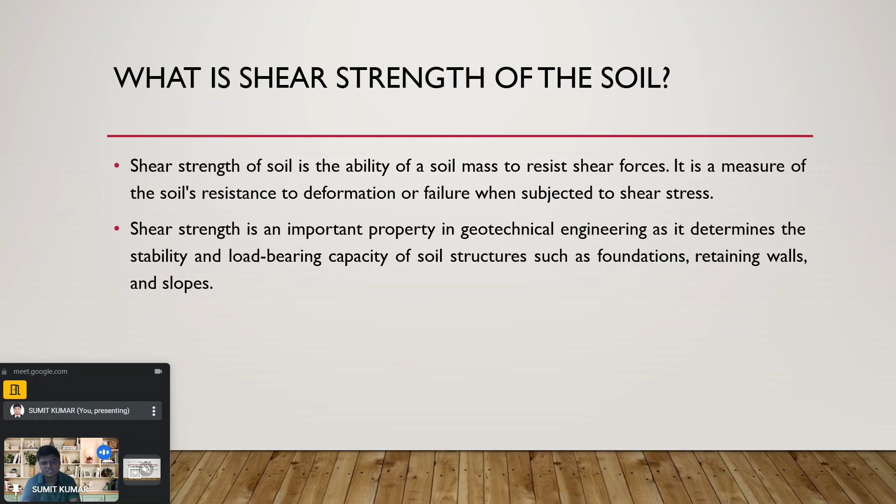Shear strength is a measure of the soil's resistance to deformation or failure when subjected to shear stress. It is an important property in geotechnical engineering as it determines the stability and load bearing capacity of the soil structure, and is essential for constructing any foundation, retaining wall, or slope.

Talking about some of the important parameters through which we find the shear strength, as we covered earlier in the triaxial test, the shear strength parameters are cohesion and angle of internal friction. Cohesion represents the shear strength of soil particles due to intermolecular force and is more significant in cohesive soils such as clay, while the angle of internal friction represents the resistance of soil particles to sliding and is more relevant in cohesionless soils such as sand.

Talking about how we can determine the shear strength of soil: the primary tests covered during this lecture series are the triaxial test, the direct shear test (also known as the box shear test), and the vane shear test, covered in detail. These tests help in understanding and generate a better outcome for geotechnical and civil engineers before construction, helping them design safe and stable structures by considering the shear strength properties of soil.

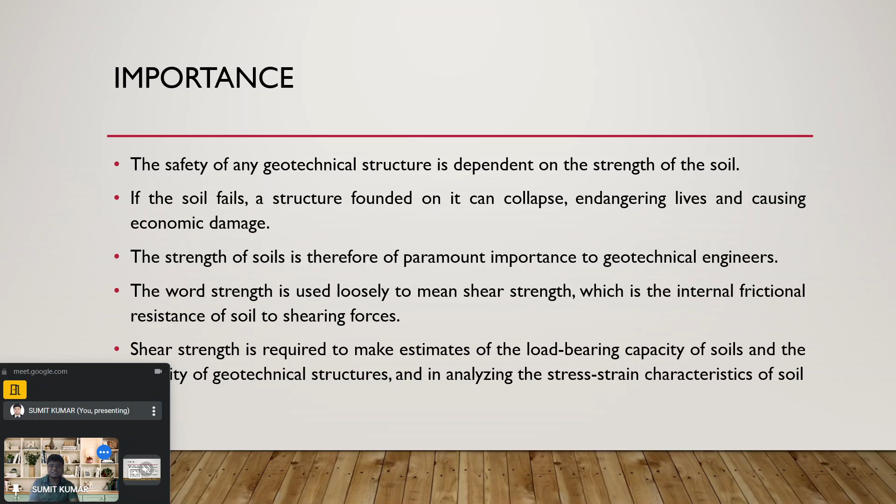Shear strength is required to estimate the load bearing capacity of soil and the stability of the geotechnical structure, and for analyzing the stress-strain characteristics of soil. So the importance of shear strength becomes very significant.

Adding some points: shear strength is a critical factor in geotechnical engineering as it determines the stability and behavior of soil under different loading conditions. Understanding shear strength is essential for designing foundations, slopes, retaining walls, and other structures. Shear strength plays a crucial role in preventing failures such as landslides, embankment collapses, and foundation settlement.

Talking about shear strength in granular soil, as we know there are granular soils and clay soils. Granular soil such as sand exhibits unique behavior under stress. In flexible boundary containers, granular soil tends to flow when subjected to stress, while in rigid boundary containers, volumetric deformation occurs, leading to changes in the shape and density of soil. Crushing, bending, and rolling mechanisms can also affect the shear strength of granular soil.

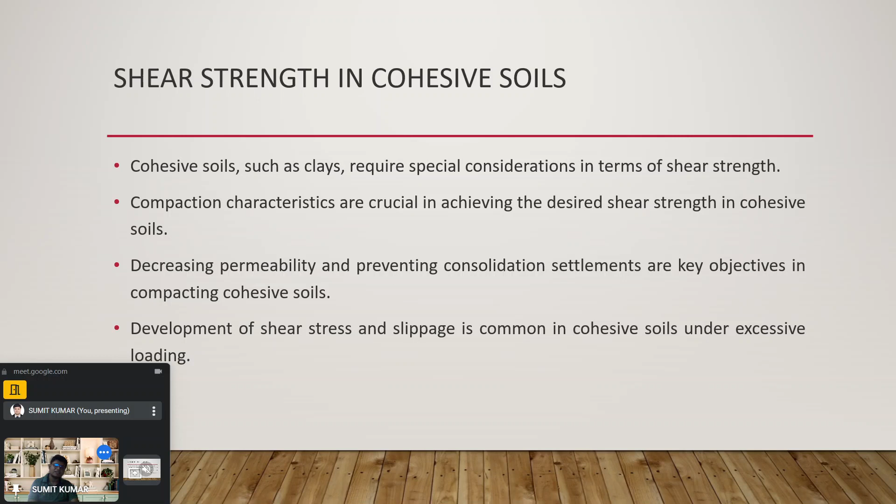Talking about shear strength in cohesive soil like clay, it requires special consideration. Compaction characteristics are crucial in achieving the desired shear strength in cohesive soil. Decreasing permeability and preventing consolidation settlement are key objectives in compacting cohesive soil. Development of shear stress and slippage is common in cohesive soil under excessive load.

So when the applied shear stress is greater than the critical shear strength of the soil, it results in failure at a specific section.

Now you can see some real examples. Over there, the detached body and parent body are represented very cleanly. You can also see that the soil section gets removed from that plane, and the main section remains stated there. So the parent body and the detached body fall down due to the failure.

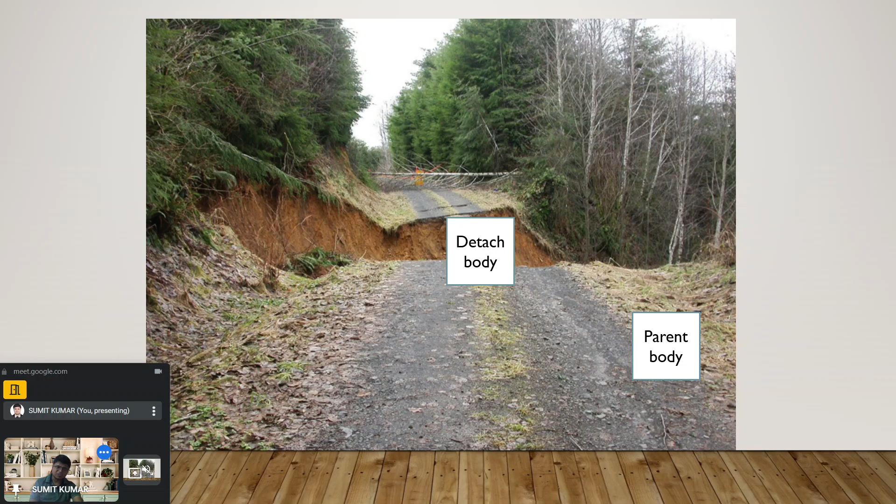Now we talk about the equilibrium equation and Mohr circle. We have also come across the knowledge of the Mohr circle during our very first class, so I will carry forward from those classes.

Equilibrium equations are used to analyze the state of stress in soil. They involve the relationship between the normal stress and the shear stress. One more point: the square of normal stress plus shear stress ultimately gives the radius, so the equation can be represented graphically using the Mohr circle.

In the Mohr circle, the x coordinate has sigma 1 and sigma 3, generalized in the form of the equilibrium equation. Afterward, you can see that the horizontal axis is the normal stress axis, while the vertical axis is the shear stress axis. This type of Mohr circle could be formed, and several problems were also taken during the first session, so you can go across those questions in the meanwhile.

I think you already have gone through those conceptual points, so there will not be any problem in anyone's mind. Okay, now...

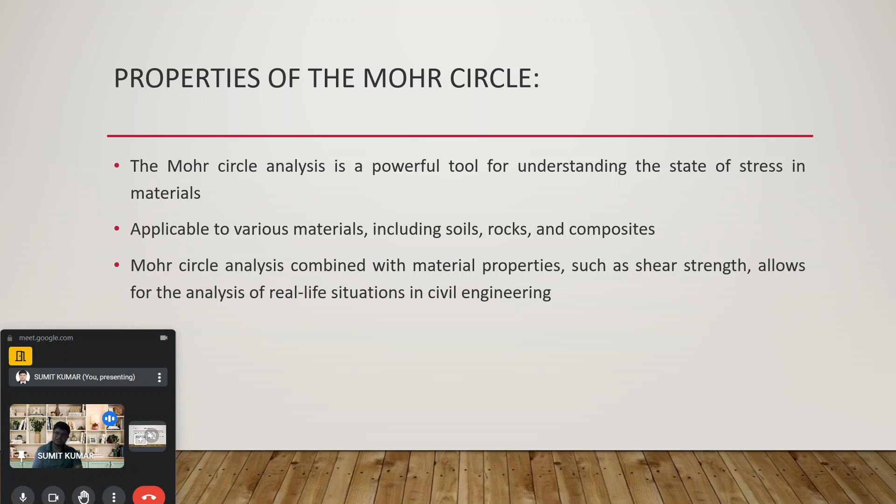Talking about the simplified solution, basically our ultimate aim is to simplify the solution to solve it analytically, and graphically is another way to solve this problem as it has normally been formed. The shear failure is a common model for the failure of soil. In the simplified solution, focus is on the shear failure and rigid body behavior. The Mohr circle is used to analyze the state of stress in soil undergoing shear failure.

The assumption is sigma x is equal to sigma 1, the major principal stress, and sigma z is equal to sigma 3, the minor principal stress. So this is one of the other perspectives.

Now, generalizing the solution: understanding the state of stress in soil is crucial in geotechnical engineering. The Mohr circle provides a useful tool for analyzing the stress and failure in soil. The simplified solution and the generalizations help in practical application. The Mohr circle defines the state of stress acting at a given point, which is sitting on a plane along which the failure is about to take place.

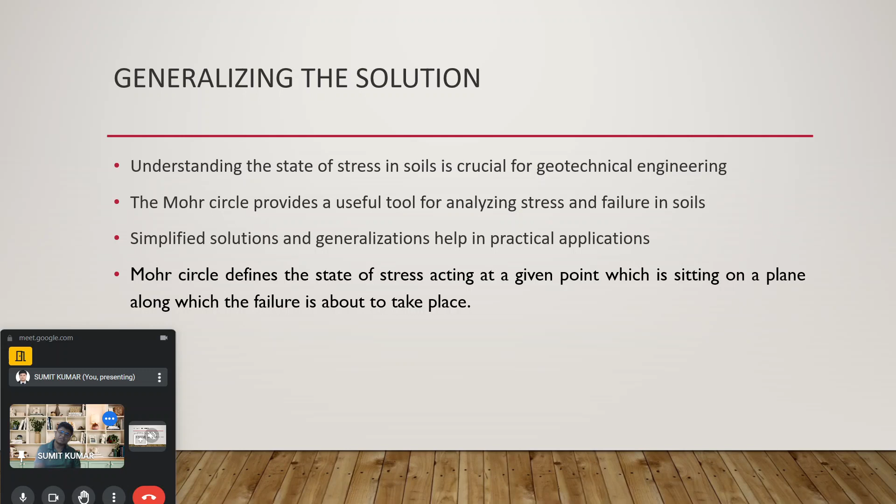Talking more about the Mohr circle analysis, so deriving the relationship between sigma square and tau square as a circle equation.

The interpretation of the Mohr circle is representation of the state of stress in a material. There are two stresses: one is the principal major stress, and another is the principal minor stress, sigma 1 and sigma 3. And a Mohr circle defines the state of stress at a point on a plane where the failure is about to occur.

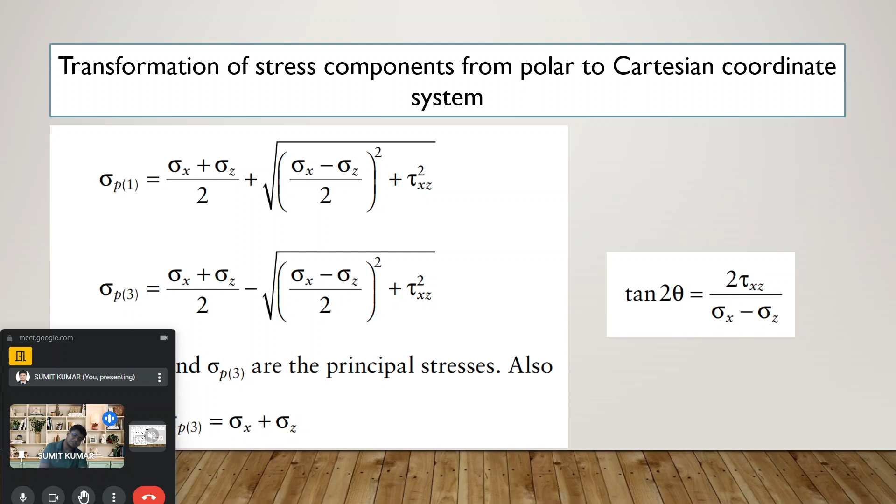Talking about its application in civil engineering is equally important. The example of infrastructure development in hilly terrain, cutting slopes and creating benches of roads and pavement. Importance of understanding the critical state of stress in such situations, and real life case studies for stabilizing slopes and constructing retaining walls are some of the applications served.

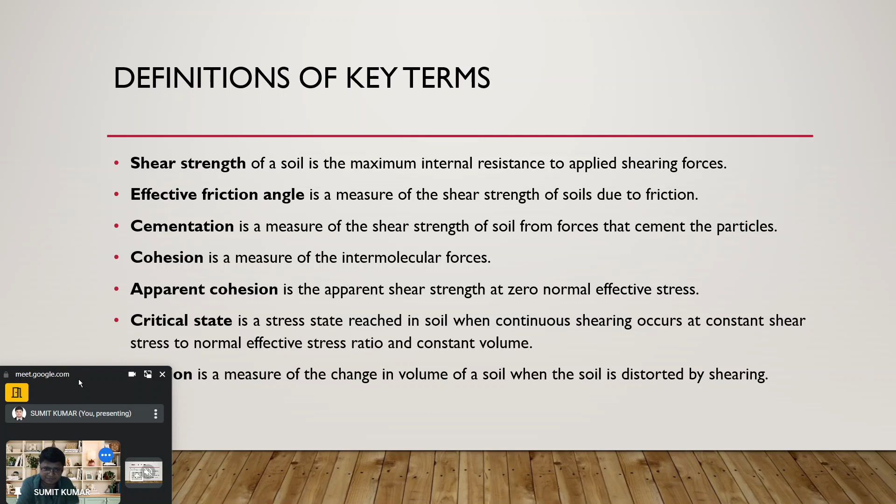Talking about shear strength: the shear strength of a soil is the maximum internal resistance to the applied shear force. Talking about the effective friction angle, it is actually a measure of the shear strength of soil due to friction. When you talk about cementation, it is a measure of the shear strength of soil from forces that cement particles apply. Talking about cohesion, it is a measure of intermolecular forces, and apparent cohesion is the apparent shear strength at zero normal effective stress.

Critical state is a stress state reached in the soil when continuous shearing occurs at constant shear stress to normal effective stress ratio, and constant volume. Talking about dilation, dilation is a measure of the change in the volume of soil when the soil is distorted by shear.

Now we move to the Mohr-Coulomb failure criteria, which is the basic main part of shear strength, where effective and total stress parameters are discussed. We will take some more points in detail, and communicate about the different types of tests which are present.

The Mohr-Coulomb failure criteria gives the functional relation between normal and shear stress on the failure plane, given as a function of sigma, where S is the shear stress at failure and sigma is the normal stress on the failure plane. So S equals C plus sigma tan phi, where C is the cohesion and phi is the angle of internal friction. This has been drawn with the shear strength axis and the normal pressure axis shown.

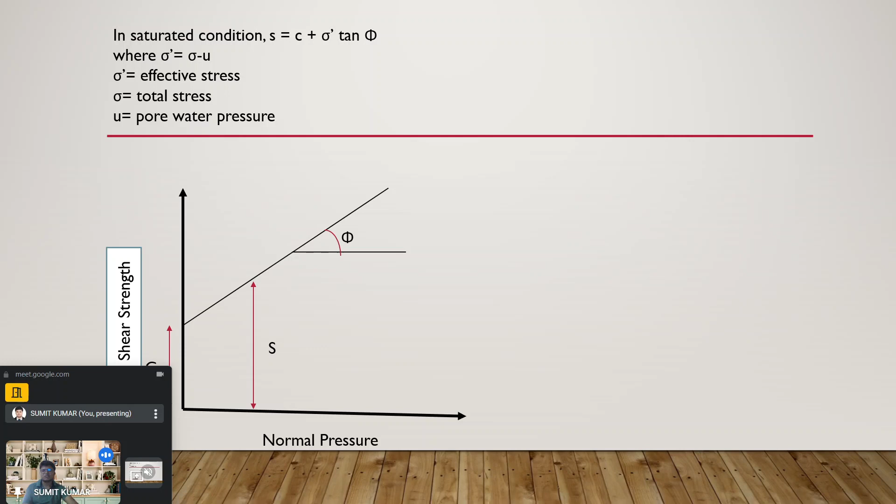So we know that S equals C plus sigma dash tan phi, where sigma dash is nothing but sigma minus u, and sigma dash is the effective stress, sigma is the total stress, and u is the pore water pressure. So total stress minus pore water pressure is the effective stress.

The major factors that influence shearing include earthquakes, which can lead to relative motion between soil layers. If a fault causes one portion of the ground to slip down, it leads to shearing, emphasizing that understanding the state of stress during shearing is crucial for stability assessment. Other factors causing shearing in soil are slope instability and different construction activities. We will go one by one through these.

Talking about application, from the start we've discussed that whatever we are studying, we should question ourselves whether it is important and what its significance is, how the study of shear strength could function.

Talking about the engineering significance of understanding shear strength in geotechnical projects, shear strength analysis helps in designing foundations, retaining walls, and slopes. The role of shear strength is most important in assessing the stability of natural and man-made slopes. Human activity like construction and expansion can alter the state of stress in soil mass, and these incremental changes in stress can lead to shearing, especially along weak planes.

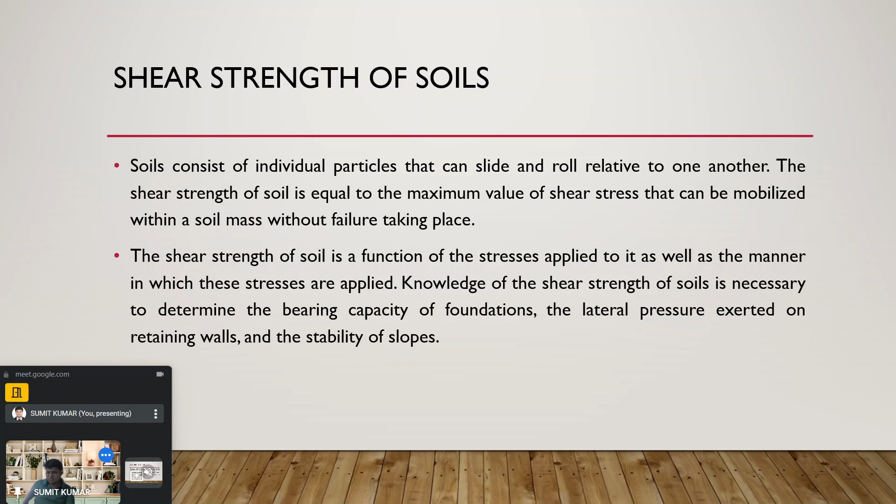When we go ahead, we come to know there are different types of tests through which we can calculate shear strength, but we primarily focus on three. We'll go one by one with their names. The first is the shear box test, which is a direct shear test. The second is the triaxial test, which is the most popular, also known as the main method of finding shear strength.

The vane shear test is another test in which torque is applied, and based on that, since the diameter of the vane is already known to us, we find the solution for the respective problem. So the different tests for shear strength are: the shear box test, triaxial test, vane shear test, torsional shear test, flat jack test, and penetration test.

The shear box test is a 2D simulation of soil conditions, and it provides a plane strain or plane stress representation of shearing behavior.

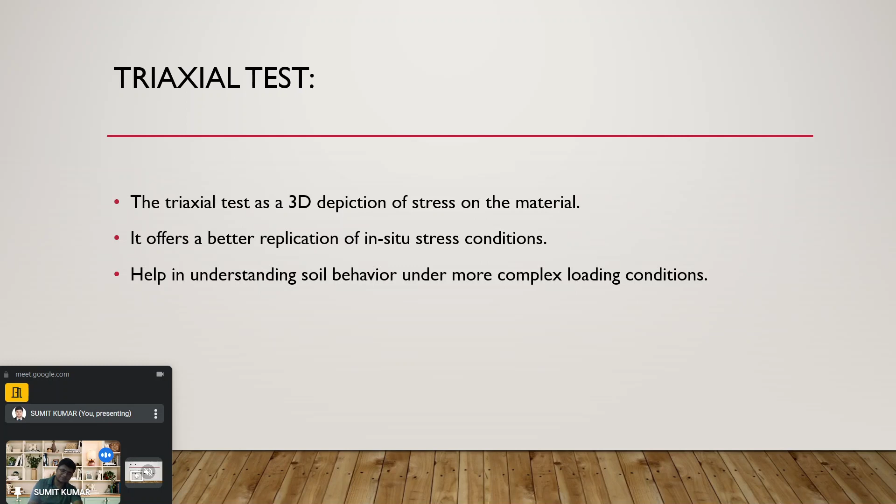Talking about the triaxial test, it is a 3D depiction of the stress on the material. It offers a better replication of in-situ stress conditions and helps in understanding soil behavior under more complex loading conditions.

Talking about the Vane shear test, it is used for soft and sensitive soils, and is applicable in laboratory and field settings, including offshore environments, to measure the undrained shear strength in difficult sampling situations.

Talking about another test, the torsional shear test, it was introduced to overcome the limitation of the shear box test at higher shearing levels, by inducing the magnitude of strain to the sample. It is significant in studying material behavior at shearing levels.

Talking about the flat jack test, it is used in rock.

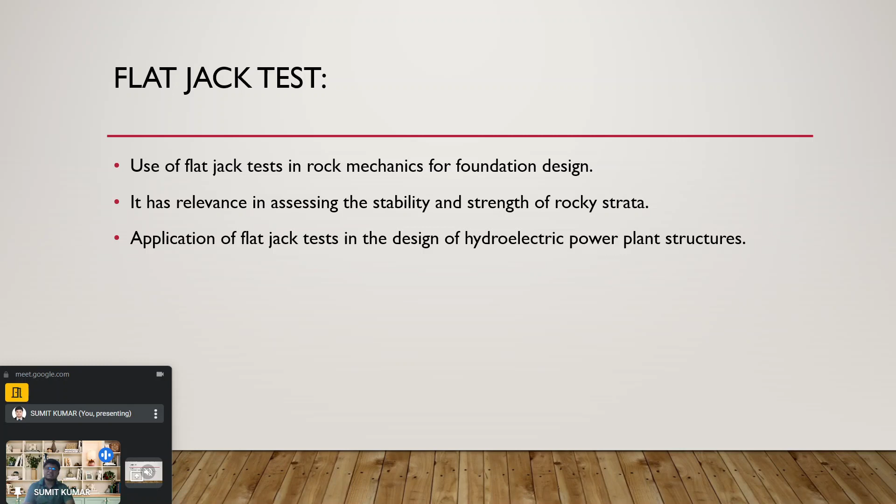The flat jack test is one of the tests through which shear stress could be calculated, and the penetration test is another method in which the SPT is first found.

Now, the method specifically used is the direct shear test, that is the box test, and the triaxial test for our analysis.

Talking about the direct shear test, this test is carried out on a soil sample confined in a metal box of square cross section, which is split horizontally at the mid height. A small clearance is maintained between the two halves of the box.

Now we are talking about the direct shear test. The test is carried out on a small soil sample confined in a metal box of square cross section, split horizontally at the mid height. A small clearance is maintained between the two halves of the box, and the soil is sheared along a predetermined plane by moving the top half of the box relative to the bottom half.

The soil is sheared along the predetermined plane by moving the top half of the box relative to the bottom half. The box is usually square in plan, typically 60 by 60 mm, and here is a typical diagram depicting the section of the direct shear test.

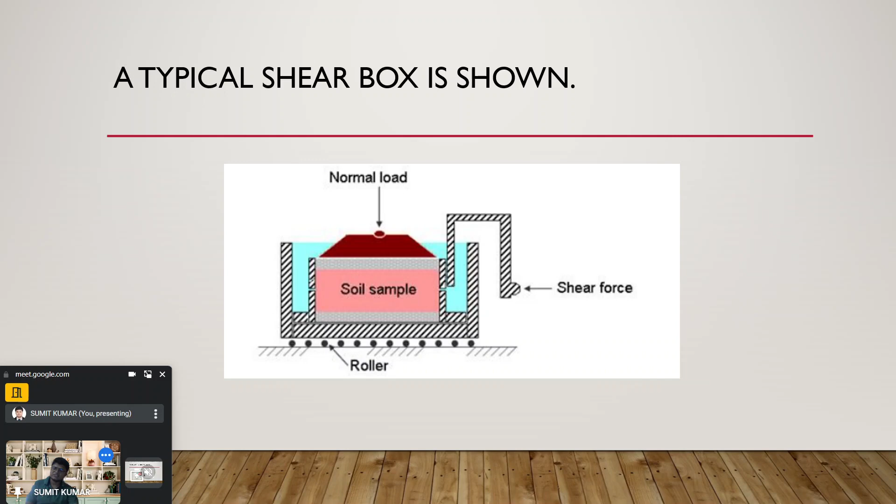You can see the conditions needed for this test: if the soil is fully or partially saturated, perforated metal plates and porous stones are placed below and above the sample to allow free drainage. If the sample is dry, solid metal plates are used.

A load normal to the plane of shearing can be applied to the soil sample through the lid of the box.

Talking about tests on sand and clay: tests on sand and gravel can be performed quickly and are usually performed dry, as water is found to not have a significant effect on the drained strength. For clay, the rate of shearing must be chosen to prevent excess pore water pressure building up.

Talking about the procedure: a vertical load is applied on the sample, then shear stress is gradually applied horizontally by causing the two halves of the box to move relative to each other.

A number of soil samples are tested each under different vertical loads, and the shear stress at failure is plotted against the normal stress of each test. This also shows that there is no excess pore water pressure in the soil, and the total and effective stresses are identical at failure, so the failure envelope can be obtained.

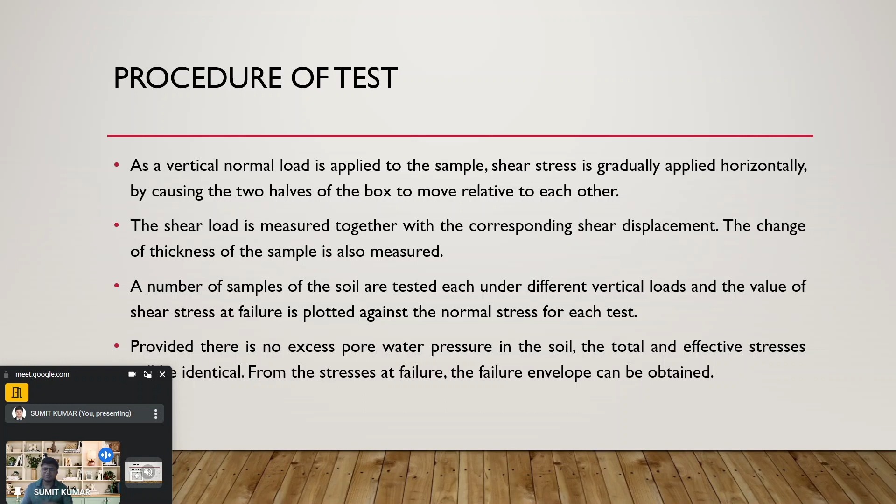Some advantages it offers: it is easy to test and understand gravels, and large samples can be tested in larger shear boxes, as small samples can be misleading.

Talking about some more advantages: the sample can be sheared parallel or perpendicular to the plane when the shear strength along features or selected planes is needed.

Talking about some disadvantages: the failure plane is already horizontal in this test, and this may not be the weakest plane in the structure.

The shear box apparatus cannot give a reliable undrained test, because it is not possible to prevent localized drainage away from the shearing zone.

Now we move to the triaxial test. Before we see the triaxial test, we have to understand this replicates the true 3D condition of the field. The triaxial test is carried out in a cylindrical cell, with a sample having a length to diameter ratio of 2, usually the size of 76 into 38.

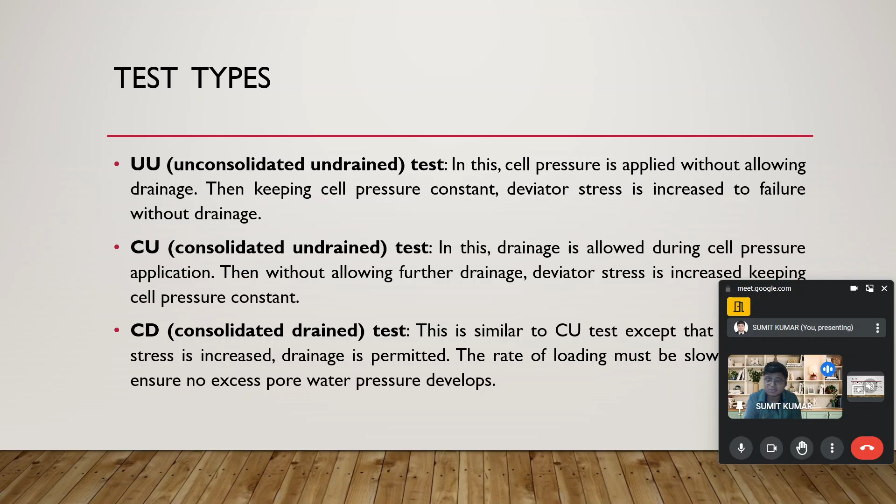In the consolidated undrained test, drainage is allowed during the cell pressure application, and then without allowing further drainage, the deviator stress is increased, keeping the cell pressure constant. For the consolidated drained test, this is similar to the CU test except that the deviator stress is increased while drainage is permitted, and the rate of loading must be slowed down to ensure no excess pore water pressure develops during this condition.

I'm talking about the significance. The first stage simulates the in-situ condition in which soil at different depths is subjected to different effective stresses, representing the actual three-dimensional case the soil faces in reality. Consolidation will occur if the pore water pressure which develops upon application of the confining pressure is allowed to dissipate. Otherwise, the effective stress on the soil equals the confining pressure, or total stress, minus the pore water pressure existing in the soil.

During the shearing process, the soil sample experiences axial strain, and either volume change or development of pore water pressure occurs, because we are talking about total stress parameters. You are already clear about total and effective stress parameters when we discuss C and phi, and C dash and phi dash. The magnitude of shear stress acting on different planes of the soil sample is different. When at some strain the sample fails, the limiting shear stress on the failure plane is called the shear strength.

Now talking about the advantages of the triaxial test over the direct shear test.

The soil sample is subjected to uniform stresses and strain, and different combinations of confining and axial stresses can be applied. Drained and undrained conditions can be carried out, and pore water pressure measurement is one of the best advantages here, which is not possible in the direct shear or box shear test. The complete stress-strain behavior can be determined, and with the help of that we are able to form the Mohr circle.

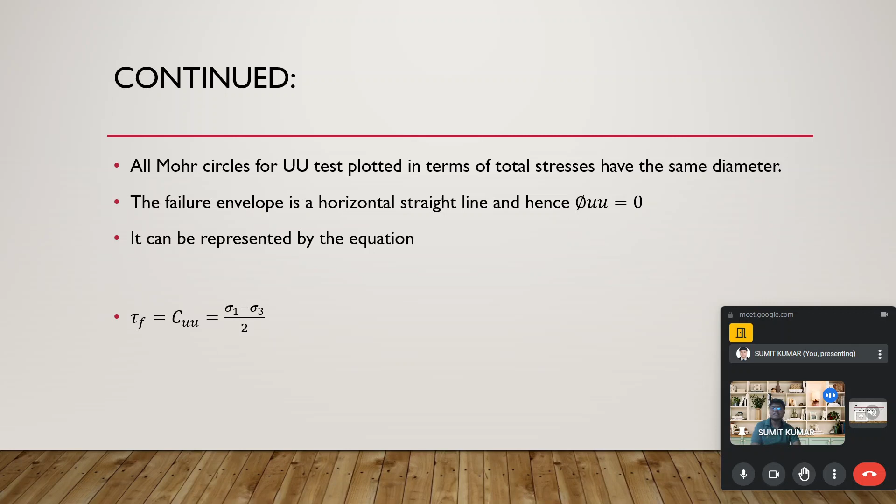Talking about the Mohr circle for the UU test plotted in terms of total stress, it has the same diameter. The failure envelope is a horizontal straight line, hence phi UU is going to be 0. It can be represented by the equation: tau F equal to CUU equal to sigma 1 minus sigma 3 by 2. When talking about the CU and CD test,

the phi CU and phi CD values will be found when we measure the angle with the horizontal plane, and C and phi will be the intercept at which these intersect when the common tangent is drawn to the Mohr circle envelope, to form the Mohr circle envelope.

For the tests involving drainage, in the first stage, when the Mohr circles are plotted in terms of total stress, the diameter increases with confining pressure, resulting in the failure envelope. Each inclined line has an intercept on the vertical axis, which is the cohesion, and the angle measured with horizontal is the friction angle.

It can be stated that for an identical soil sample tested under different drainage conditions in UU, CU, CD tests, the failure envelope is not unique, and this is because we are talking about the total stress approach.

But when we move to the effective stress approach, the results confirmed by the three tests show the exact same outcome. So the effective stress parameter, when we talk about it, the same triaxial test results of UU, CU, CD tests are plotted in terms of effective stress, taking into consideration the measured pore water pressure. It is observed that all the Mohr circles at failure are tangent to the same failure envelope, indicating that the shear strength is a unique function of the effective stress on the failure plane.

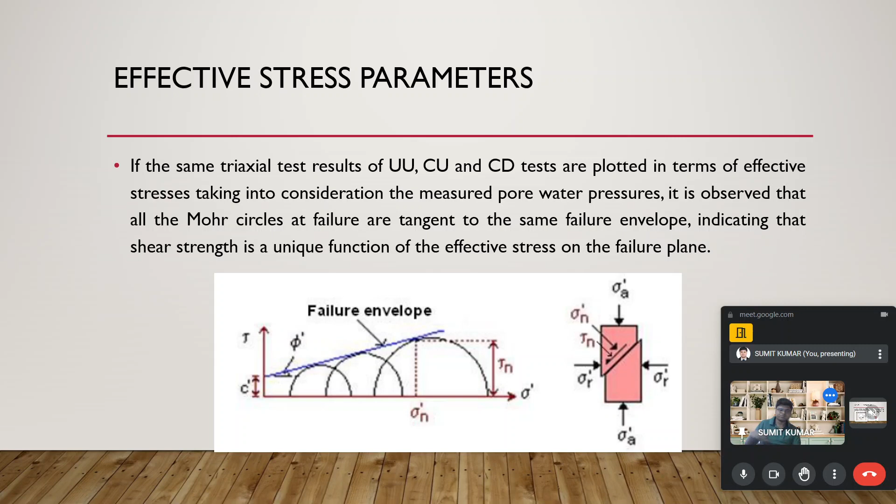Now going ahead, this failure envelope is the shear strength envelope, which may be written as tau f equal to C dash plus sigma dash tan phi dash, where C dash is the cohesion intercept in terms of effective stress, and phi dash is the angle of shearing resistance in terms of effective stress. So sigma n dash is the effective stress acting on the rupture plane.

Phi dash is the angle of resistance in effective stress, and sigma n dash is the effective stress acting on the rupture plane at failure, and tau n is the shear stress on the same plane, and is therefore the shear strength.

Now we interrelate sigma 1 and sigma 3 as: sigma 1 dash equal to sigma 3 dash into (1 plus sine phi dash) by (1 minus sine phi dash) plus 2c dash root under (1 plus sine phi dash) by (1 minus sine phi dash).

It is also interrelated in another term using tan: sigma 1 dash equal to sigma 3 dash tan squared of (45 plus phi by 2) plus 2c tan of (45 plus phi by 2), because when we solve trigonometrically both are the same thing. Now talking about triaxial testing in geotechnical engineering.

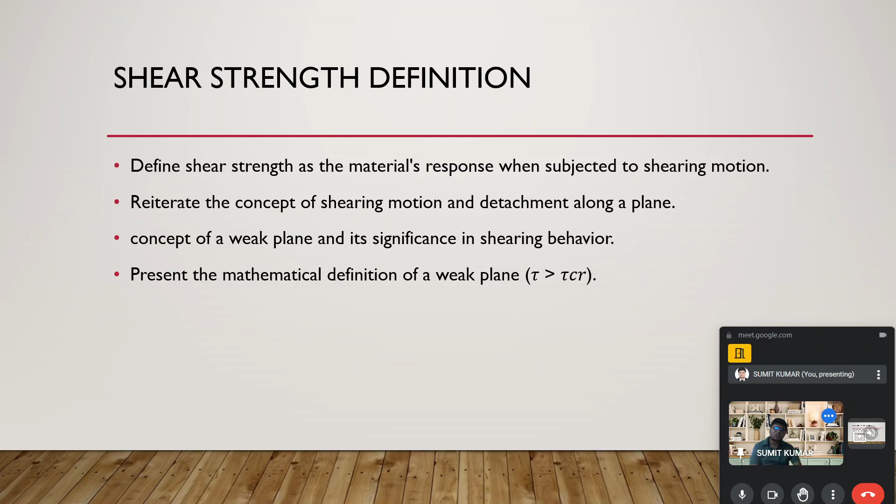The factors which influence shearing, the major factors are earthquakes, which can lead to relative motion between the soil layers, a fault causing a portion of the ground to slip down, leading to shear failure. Understanding the state of stress during shearing is crucial for stability assessment.

Other factors like slope instability and other activities like construction activity can also lead to failure. Talking about the application and significance, the engineering significance of understanding shear strength in geotechnical projects.

Shear strength analysis helps in designing foundations, retaining walls, and slopes. The role of shear strength is most important in assessing the stability of natural and man-made structures. Human activities like construction and excavation can alter the state of stress in the soil, and incremental change in stress can lead to shearing, especially along the weaker plane.

Talking about the Mohr-Coulomb failure criteria, when a soil sample has failed, the shear stress on the failure plane, that defines the shear strength of the soil. Thus it is necessary to identify the failure plane. It is the plane on which the maximum shear stress acts, or the plane where the ratio of shear stress to normal stress is maximum.

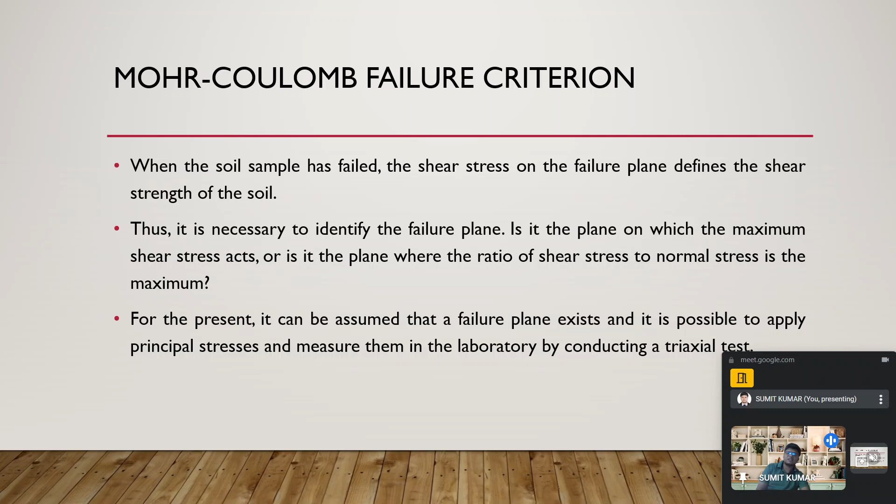For the present discussion, it can be assumed that the failure plane exists, and it is possible to apply the principal stresses and measure them in laboratory conditions in a triaxial test. Talking more about the Mohr-Coulomb failure criteria, the Mohr circle of stress at failure of the sample can be drawn using known values of the physical principal stresses.

If data from several tests carried out on different samples up to failure is available, a series of Mohr circles can be plotted. It is convenient to show only the upper half of the Mohr circle. A line tangent to the Mohr circles can be drawn, which is called the Mohr-Coulomb failure envelope.

So here the Coulomb failure envelope has been shown in this diagram, and we can see that the common tangent to the different Mohr circles forms the Mohr-Coulomb failure envelope. The intercept on the y-axis is the cohesion, and the angle made with the horizontal is the angle of internal friction.

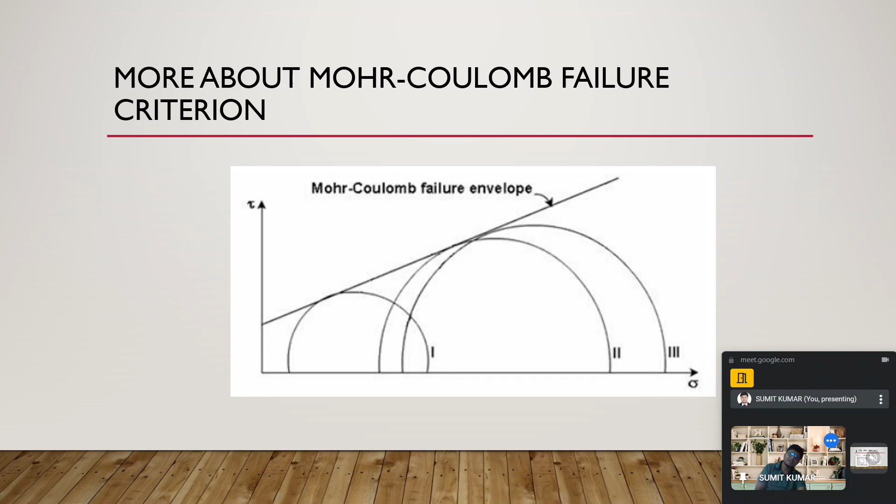Now moving to the more concerning part, we came to understand how sigma 1 and sigma 3 are plotted. First of all, we apply sigma 3 dash, and accordingly find sigma 1 dash. Going ahead step by step, sigma 3 2 dash is plotted and sigma 1 2 dash is found.

After that, a common tangent has been drawn, and the intercept on the y-axis shows cohesion, and the angle with the horizontal shows the angle of internal friction.

So talking about this, if the stress condition for any soil sample is represented by a Mohr circle that lies below the failure envelope, every plane experiences shear stresses smaller than the shear strength of the sample, so it doesn't fail.

But the point of tangency of the Mohr circle with the failure envelope gives a clue to determine the inclination of the failure plane. One more point I want to add: when any point is below the Mohr-Coulomb failure envelope, it is safe, and the stress there doesn't lead to failure, but if any point goes above that, it will lead to failure at that position.

I think this point is very much clear to you, because this discussion has been done again and again at several points in time.

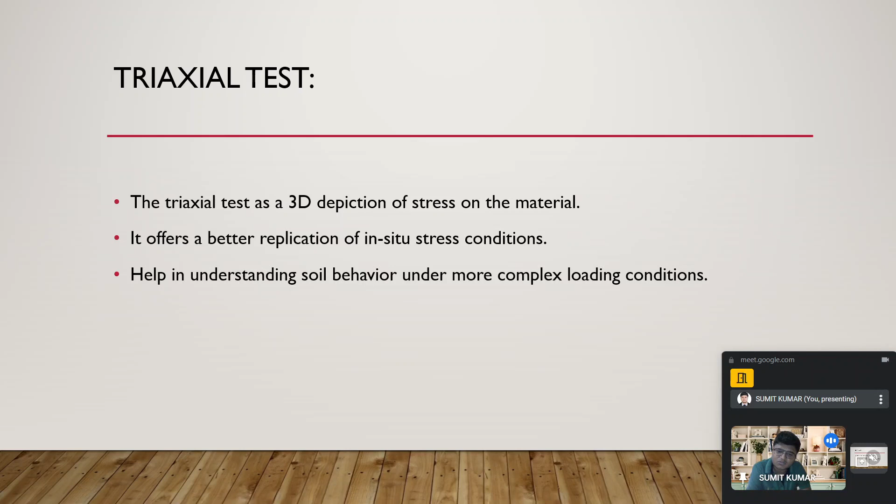Now, in a triaxial test as a 3D depiction of stress on a material, it offers a better replication of in-situ stress conditions and helps in understanding soil behavior under more complex loading conditions, because it replicates the actual loading condition in the process.

Talking about the different aspects used in a triaxial test, it is carried out in a cell with a cylindrical soil specimen having a length to diameter ratio of 2, with usual sizes of 76 into 38 or 100 into 50. The three principal stresses are applied to the soil sample, of which two are applied by the water pressure.

So that's why sigma 1, sigma 2, sigma 3 - two stresses are the same. That's why the 2D representation calculation could be performed, and the third principal stress is applied by loading the ram through the top of the cell, different from the other two principal stresses. The typical triaxial cell is shown in this diagram.

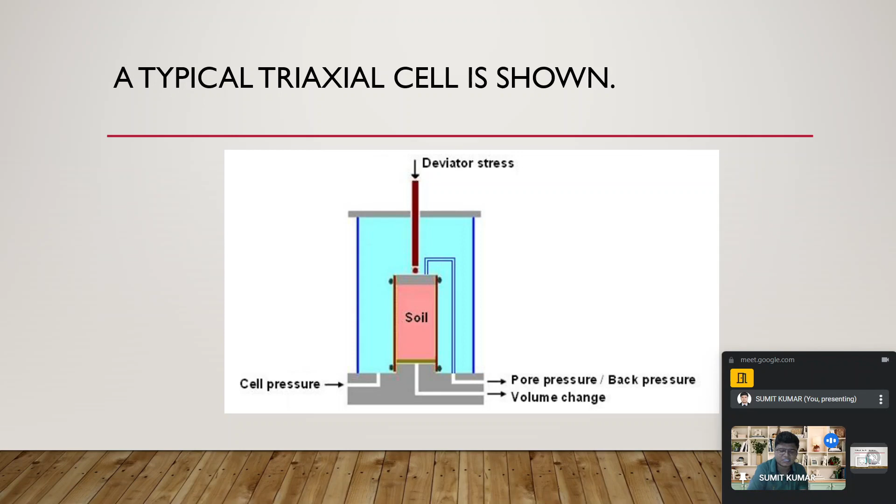You can see how the cell pressure is applied and how the pore pressure back pressure works. This is discussed in much detail, so I'm not going to discuss it here because this is a revision session where I try to summarize all the parts.

Now talking about the procedure, we have studied how the test setup goes on, earlier as well as in today's class. So I will not take it up again. Now talking about the triaxial test fundamentals - its setup, types of test, and the significance of parametric analysis are very important while studying.

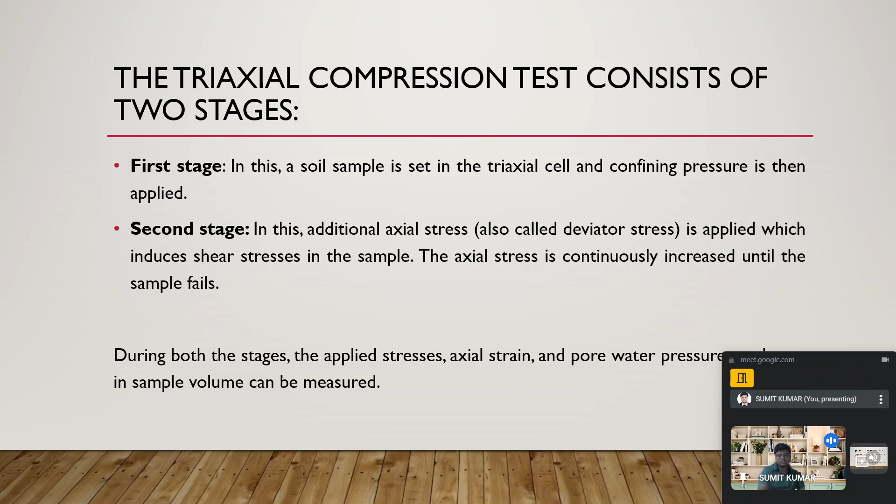The first stage and second stage have already been discussed. This has come up again due to some problem. Stage one is where the confining pressure is applied, like sigma 3, applied from two directions in an identical way, while in the third direction another stress has been applied.

Now understanding the triaxial testing, the purpose is to evaluate the shear strength parameters of soil. Sample collection is one parameter in which the exact cylindrical sample of the field is taken, and then the setup is mounted as shown in the previous picture, mounted on the porous stone sandwiched between the loading and base plates.

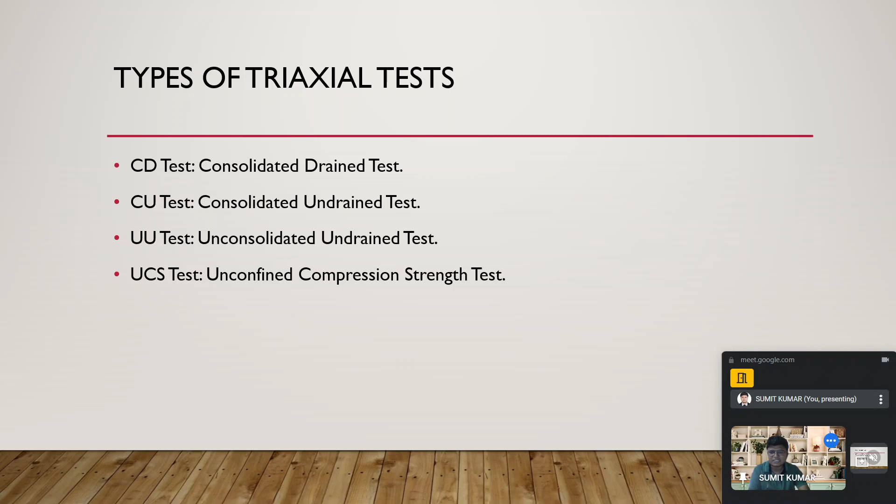The CD test, CU test, UU test, and UCS are some of the tests. Talking about the triaxial test, CD, CU, and UU are the three types of triaxial tests which are usually performed. Talking about pore water pressure measurement.

It is important to understand the influence of pore water pressure. The valve used to apply the back pressure or measure the pore water pressure is part of the measurement setup, and the impact of consolidated undrained and unconsolidated undrained tests with the influences of test types.

Talking about the shear strength parameters like cohesion and internal friction angle - these are the shear strength parameters. The triaxial test offers a comprehensive insight into the soil behavior and...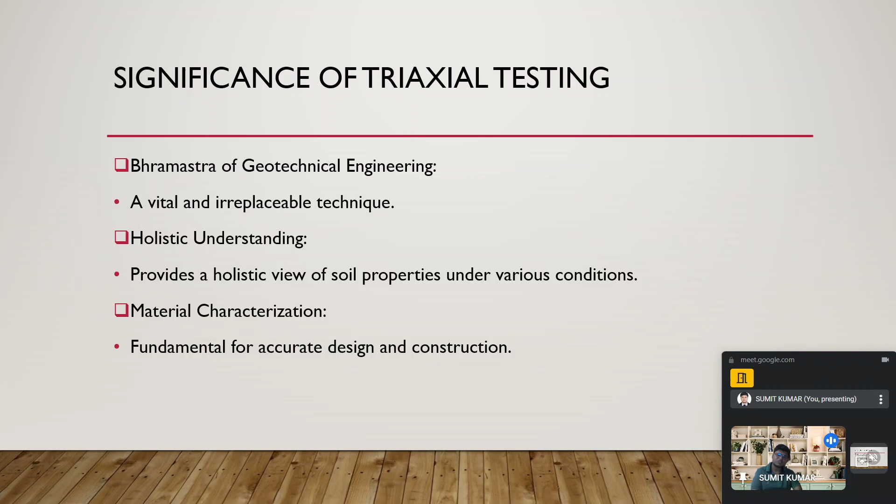Talking about design implementation, the derived parameters are crucial for geotechnical designs. Now talking about the significance, it is one of the most important tests which could be used to find the main parameters of the soil before starting any other test, and it provides a holistic view of soil properties in various conditions, fundamental for accurate design and construction.

Talking about significance, the first stage simulates in the laboratory the in-situ condition that soil at different depths is subject to different effective stresses. And consolidation will occur if the pore water pressure which develops upon application of confining pressure is allowed to dissipate.

If this doesn't happen, the effective stress on the soil is the confining pressure or total stress minus the pore water pressure which exists on the soil.

Talking about during the shearing process, the soil sample experiences axial strain, and either volume change or development of pore water pressure occurs. The magnitude of the shear stress acting on different planes in the soil sample is different.

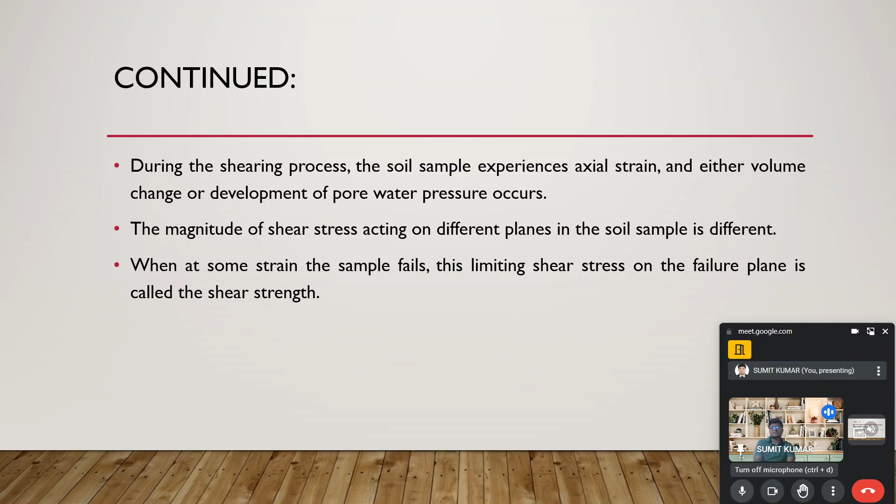When at some strain the sample fails, this limiting shear stress on the failure plane is called the shear strength.

Now, to recap this section, the triaxial test stands as very important in geotechnical engineering, offering profound insight into the shear strength parameters of soil by performing different types of triaxial tests and incorporating pore water pressure measurement. The engineer gains a comprehensive understanding of the behavior. This understanding is crucial for making informed decisions in geotechnical engineering and construction projects. Such tests remain timeless and essential tools that continue to shape the field of geotechnical engineering.

Now talking about some more points, like the Skempton parameters A and B, where B equals delta U by delta sigma 3, and A-bar is equal to A times B, and A-bar is equal to delta U by delta sigma 1 minus sigma 3.

So ultimately we are able to find the Skempton parameters, and on the basis of that we are able to determine whether the soil is saturated or not saturated, and on the basis of that the test can be proceeded.

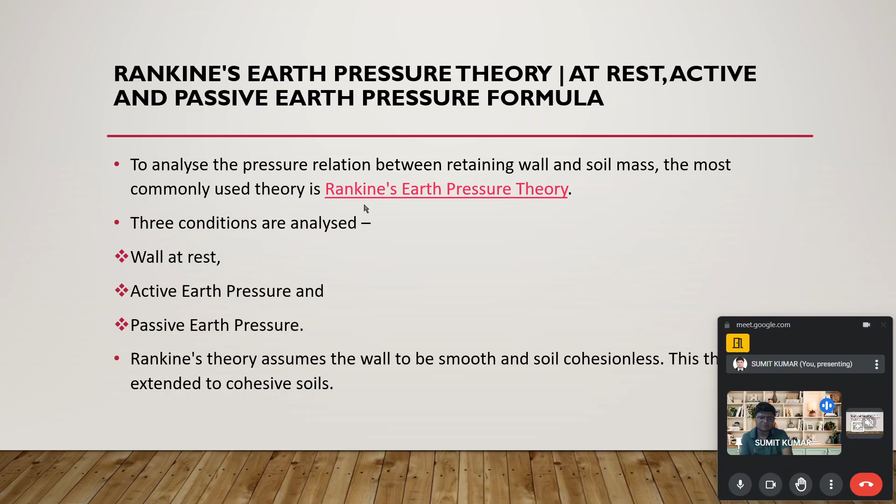This is only a revision session where I try to sum up the entire concept. We have read the Rankine earth pressure theory at rest, active, and passive state conditions. To analyze the pressure relation between retaining walls and soil masses, the most commonly used theory is the Rankine earth pressure theory. Three conditions are analyzed: the wall at rest, active earth pressure, and passive earth pressure. Rankine theory assumes the wall to be smooth and cohesionless, and this theory has also been extended to cohesive soil by Bell.

Now, regarding the retaining wall and backfill: every time it is not possible to place soil until it has greater shear strength, so we construct a wall to keep it in place and fill the soil back. This is called the backfill, and the wall is called the retaining wall. If the wall hadn't been there, the soil mass could have moved out, which implies the soil mass applies some pressure on the wall, called the earth pressure. So we should design the retaining wall against the earth pressure. The soil shown here is the backfill, and the wall constructed to prevent the soil from moving is the retaining wall.

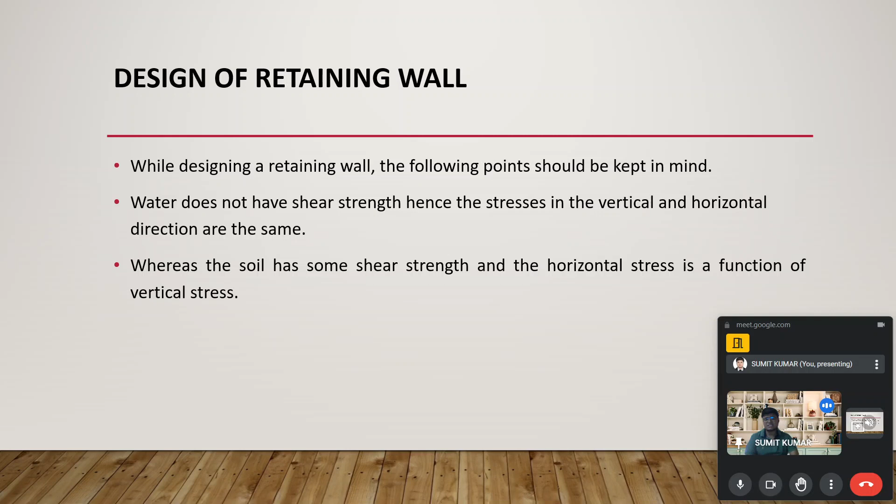Now, talking about the design of a retaining wall, the following points should be kept in mind. Water does not have shear strength, hence the stress in the vertical and horizontal directions are the same. Whereas soil has some shear strength, and the horizontal stress is a function of vertical stress.

Talking about the types of wall movement, the wall will attain three conditions at any point of time according to wall position, and earth pressure changes with these three general conditions. First, the wall does not move, or the wall is at rest. Second, the wall moves away from the backfill, the active earth pressure condition. Third, the wall moves toward the backfill, the passive earth pressure condition. You should understand that in the active earth pressure condition, the stress applied from the top and bottom direction will be more compared to the horizontal direction, and vice versa when the wall moves toward the backfill.

Now, what do we mean by wall at rest? Wall at rest is the condition in which there is no movement of the wall, neither moving toward the soil nor away from it. That is the rest condition. In this condition, the wall and its base are rigid, which makes the wall stay in a single place without any movement. As the wall does not move in any direction, the lateral strain ratio, of change in area to the original area, is zero.

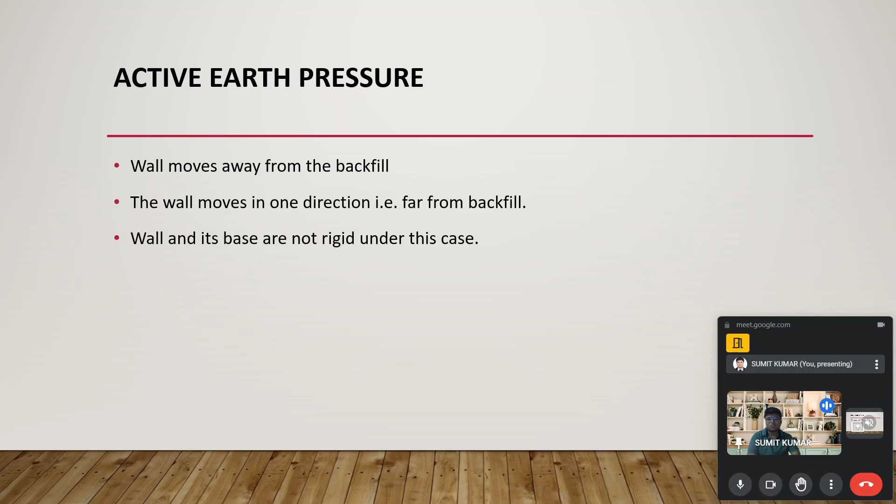Talking about the active earth pressure: the wall moves away from the backfill, in one direction, and the wall and its base are not rigid under this case. Here is a schematic diagram showing the active earth pressure condition, where the wall is moving away from the backfill. The retaining wall moves away from the backfill because it is vertical. Now it has moved away. As the wall moves away from the soil, the pressure of the soil gets relieved, and hence the shear resistance gets mobilized in opposition to the wall movement. Since shear resistance acts in the opposite direction, the pressure in the horizontal direction gets reduced.

As the wall keeps moving away, we reach a condition where full shear resistance is mobilized. After that point, there will be no further resistance if it moves away, because at that point there is no stress remaining in that direction for the backfill to move the wall away from it. Similarly, the horizontal pressure would be minimum in this case because the stress has been relieved. So that will be minimum, which is easy to understand.

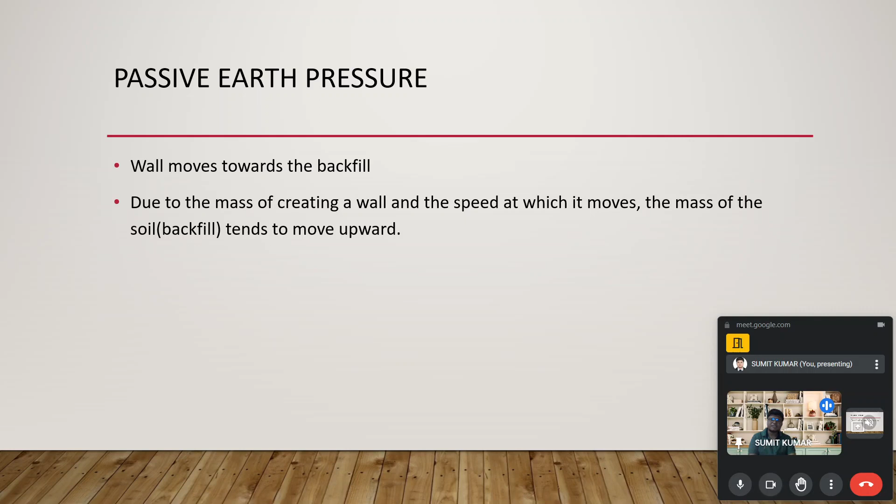Now, talking about the passive earth pressure. In passive earth pressure, the wall moves toward the backfill, and due to the mass of the wall and speed at which it moves, the mass of the soil backfill tends to move upward. The schematic diagram shows the wall moving toward the backfill. In this case, the stress in the horizontal direction will be more compared to vertical, and the shear resistance acts in the same direction as the horizontal pressure. There will be a situation where the stress is maximum, and that is the condition when the passive earth pressure gets developed.

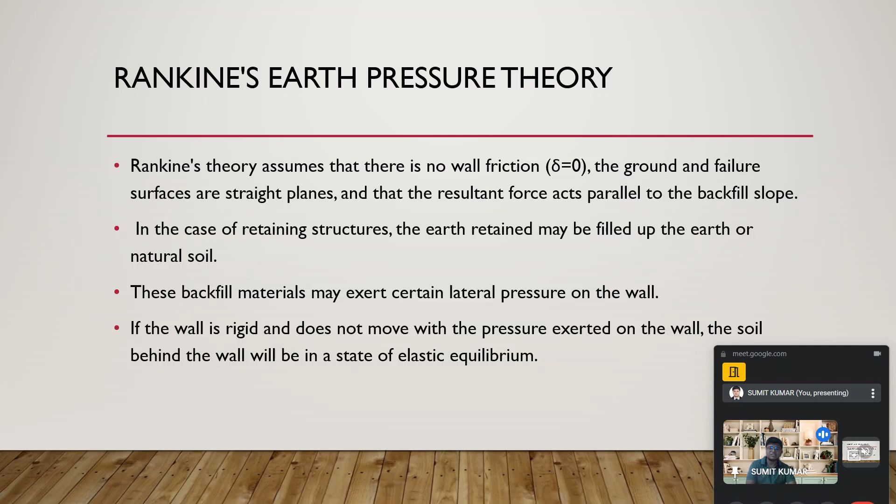Now, talking about the Rankine Earth Pressure Theory, some more points to add. The Rankine theory assumes there is no wall friction, that is delta equal to zero. The ground and the failure surface are straight planes, and the resultant force acts parallel to the backfill slope. In the case of a retaining structure, the earth retained may be filled up earth or natural soil. These backfill materials may exert a certain lateral pressure on the wall. If the wall is rigid and does not move with the pressure exerted on it, the soil behind the wall will be in a state of elastic equilibrium.

So now we discuss these terms in detail. We find that the earth pressure constant is the ratio of earth pressure in the horizontal direction to the earth pressure in the vertical direction. So sigma h by sigma v is the earth pressure constant. Whenever we are talking about the rest, active, or passive condition, the same will be the case, and on that basis we have derived our interrelation.

The Rankine earth pressure theory was originally applicable only to uniform cohesionless soil, as proposed by Rankine, but later in 1915 it was extended for cohesive soil as well, and used where all plastic equilibrium remains for active and passive earth pressure. This means for every point in the soil, shear failure is just about to happen. In reality, only a part of the soil mass will be in plastic equilibrium, but that is the assumption made.

Assumptions of the Rankine theory: the soil is isotropic and homogeneous, which means C, phi, and gamma have the same value everywhere, and the same value in all directions at every point. That is, the strength of the vertical plane is the same as that of the horizontal plane. Note that the theory is also applicable for multi-layered soil having different C, phi, and gamma in different layers, since for different soil layers these values will vary at each location.

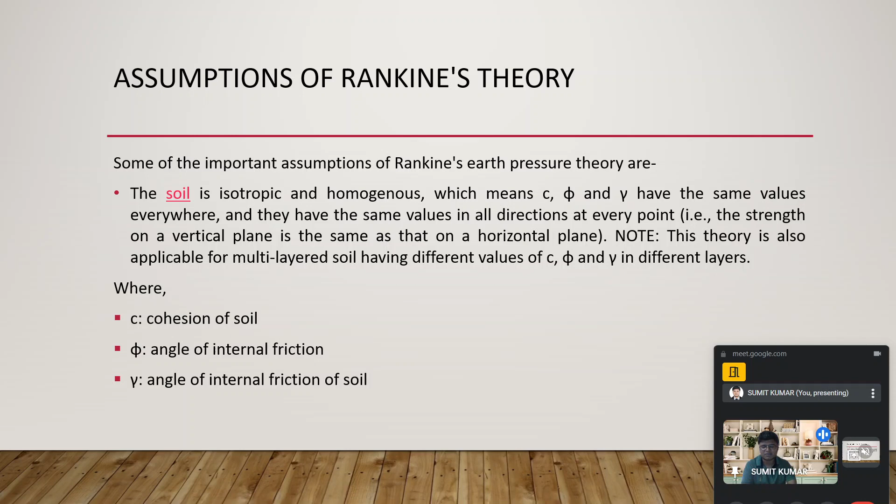Some more assumptions: the wall is infinitely long, hence the problem may be analyzed in only two dimensions, as a plane strain condition in geotechnical engineering. The ground surface is a plane, although it does not necessarily need to be level, and there is no wall friction, that is delta equal to 0, and the wall moves sufficiently to develop the active or passive condition. The most critical shear surface is a plane. In reality it is slightly concave, but this is a reasonable assumption, especially for the active cases, and it simplifies the analysis. The resultant of the normal and shear force that acts on the back of the wall is at an angle parallel to the ground surface.

Talking about the Rankine earth pressure theory separately when at rest, the theory of elasticity is used here. There is zero displacement, so zero strain, and the soil is homogeneous, isotropic, and semi-infinite. The elastic modulus and the Poisson ratio are constant for the total soil mass.

The coefficient of earth pressure at rest, or at rest earth pressure constant, is defined as K naught, and it is the ratio of horizontal shear stress to the vertical shear stress as discussed above. This can be represented as 1 minus sine phi, where phi is the angle of internal friction, and in another sense it has also been represented as mu by 1 minus mu. Both are the cases with the earth pressure constant at rest.

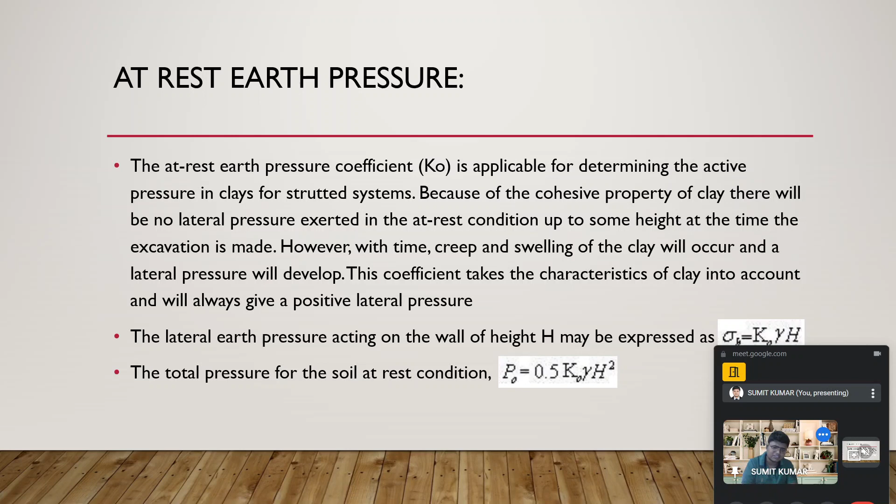The lateral earth pressure acting on the wall of height h may be expressed as sigma h equal to k naught into gamma h, and the total pressure is 1 by 2 k naught into gamma h square. That is nothing but the area of that stress diagram with the special coefficient k.

Now, the value of K naught depends on the relative density of sand and the process by which its deposit was formed. If the process does not involve artificial tamping, its value ranges from 0.4 for loose sand to 0.6 for dense sand. Its overall range has also been represented in a slide which has been shared with you when I am taking this session. I haven't kept that slide over here, but you can go across it. That need not to be remembered, it will only give you a basic idea.

Some more interrelations have been represented here, but that is not part of your syllabus. This is extra, so you can avoid this.

What do we mean by 1 by 2 k naught gamma h square? This is a stress diagram with the k naught value plotted, and on the basis of that, when we find the area, that is p naught, which acts at h by 3 from the base. Similarly, the stress at a specific depth is nothing but k naught into gamma z.

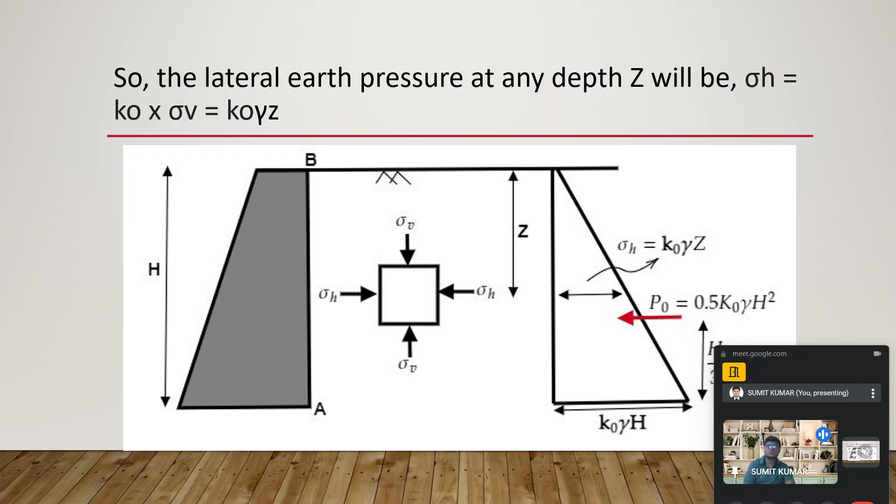Here, the soil is not layered, only one property of soil is present. If stratified soil is there, we differentiate the k naught and gamma z, and specifically if the phi value is also different. Here we are talking about stress at rest, so k naught applies, but when we move forward to active and passive conditions, the variation in k takes place and the diagram is not always linear; it will vary from section to section.

The resultant pressure at rest acts at h by 3 from the bottom of the pressure diagram, shown as p naught, and p naught is nothing but 0.5 into k naught into gamma h square.

Now see the active earth pressure condition—we have already discussed the at rest, now we move to active. In this condition, the wall moves away from the backfill, and the state of plastic equilibrium in soil refers to the condition where every point in the soil mass is on the verge of failure.

Talking about the general formula for the lateral pressure in the active condition, sigma h equals k into gamma z minus 2c root k, where k equals 1 minus sin phi by 1 plus sin phi. When solved trigonometrically, its value also becomes tan square 45 minus phi by 2. When this entire relation is written with k replaced by tan square 45 minus phi by 2, this relation comes, and that is what we use to solve the problem.

We have discussed these concepts as well, in which the pressure distribution diagram can be represented, where minus 2c root k is at the top at z equal to 0, and at z equal to zc the value is 0, and for the unsupported depth of excavation, that is 4c by gamma root k. The horizontal pressure at z equal to 0 is k gamma z minus 2c root k. For z equal to 0, sigma h equals minus 2c root k, which is also plotted for the same case.

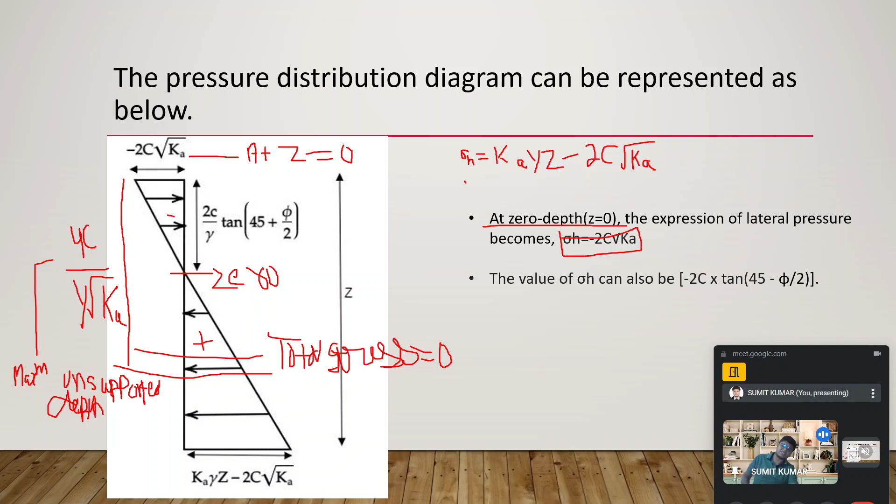For cohesionless soil, C is 0, so the expression for the lateral pressure becomes K gamma Z.

This is the actual term given by Rankine, and it has been modified by Bell for cohesive soil, because for cohesionless soil there is no cohesion, so it's not a problem at any point. Talking about the coefficient K here, that is 1 minus sin phi by 1 plus sin phi, or tan square of 45 plus or minus phi by 2, or cot square 45 plus phi by 2, same thing.

So sigma h equals gamma z tan square 45 minus phi by 2. In this case the negative side of the pressure distribution diagram will not be there, because at z equal to 0, sigma h equals 0, and the pressure distribution diagram starts from the origin.

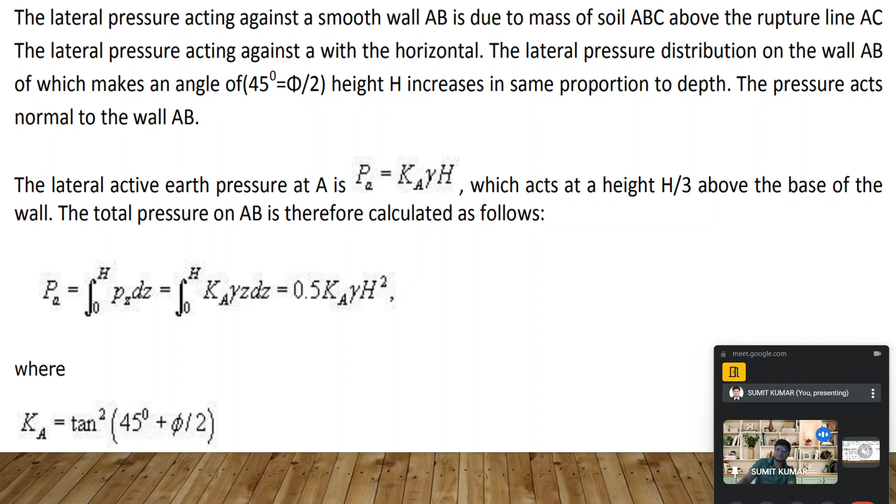Now let's see how the failure plane makes its angle, as represented here. The failure plane in the soil makes an angle of 45 plus phi by 2 degrees with the direction of the major principal planes, as shown, and these are called the potential slip planes. Some more points have been represented here, but I am not going to discuss this — go across the main PDF for this.

Now we will move to the passive expression. Because of the limitation of time, I have to move forward in a faster manner. In this condition, the retaining wall moves toward the soil mass backfill, and the formula and expressions are quite similar to the active state. Some positive and negative sign changes in the active state formula will do the job. This way it's very easy to remember this formula, as remembering is also important. So these are interrelated, and the plus and minus sign is only replaced, and we are able to form it.

So over there you see 2c root Kp is there, and that will be in addition. First, 2c root Kp is plotted, and in addition the linear variation of stress has been plotted. So this type of stress distribution has been shown for the passive earth pressure. For the cohesionless soil, when C is 0, Kp gamma Z is the only term, and Kp is 1 plus sin phi by 1 minus sin phi. So sigma H is gamma Z into tan square 45 minus phi by 2, which has been mentioned here.

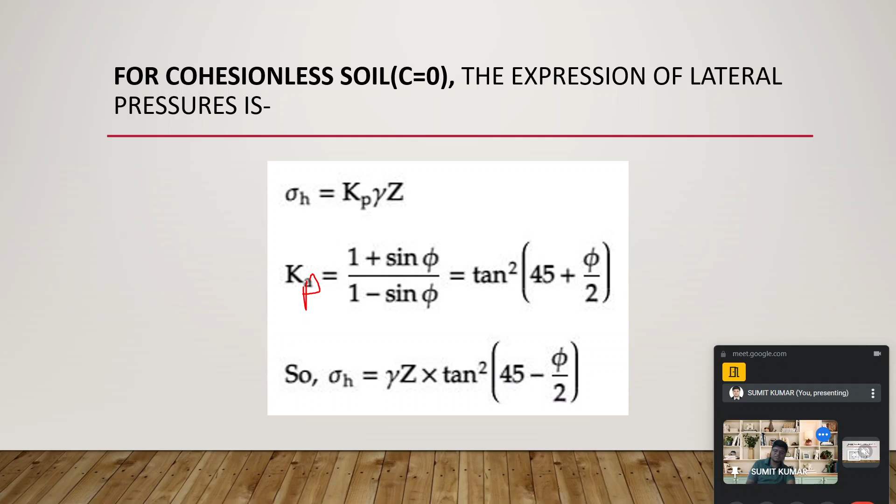I think up to this, everything is clear in everyone's mind. I think there will be no problem.

Now we talk about the failure plane. As we have seen, the failure plane in... excuse me for a minute.

So now you will find that the failure plane is independent here. This is the similar condition which we are discussing. Now we talk about the Coulomb theory in very brief, and then we will move forward.

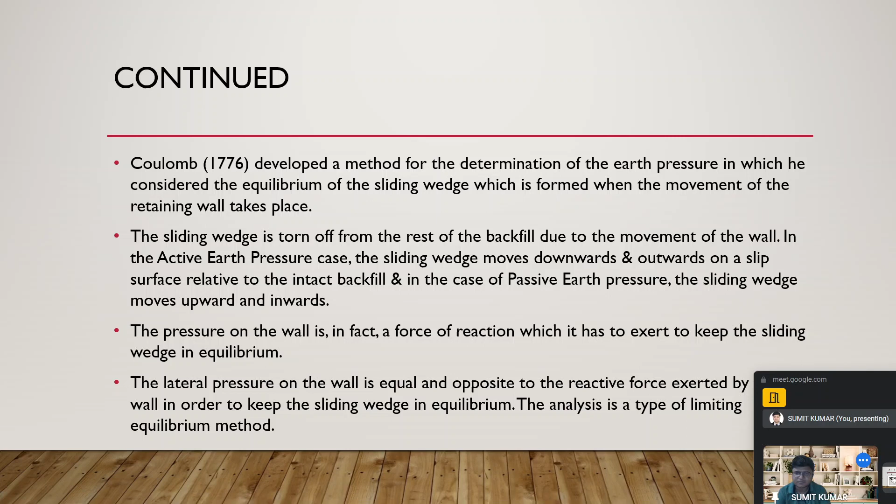Some of the assumptions made are: the backfill is dry, cohesionless, homogeneous, isotropic, and ideally plastic material, elastically undeformable but breakable. The slip surface is a plane surface that passes through the heel of the wall, and the wall surface is rough. The resultant earth pressure on the wall is inclined at an angle normal to the wall, where the angle is the friction between the wall and the backfill. The sliding wedge itself acts as a rigid body, and the value of the earth pressure is obtained by considering the limiting equilibrium of the sliding wedge as a whole.

The position and the direction of resultant earth pressure are known, and resultant earth pressure acts on the back of the wall at one-third height of the wall from the base, and is inclined at an angle normal to the back, called the angle of wall friction. Since the back of the wall is rough, relative movement between the wall and the soil develops frictional force that influences the direction of resultant pressure.

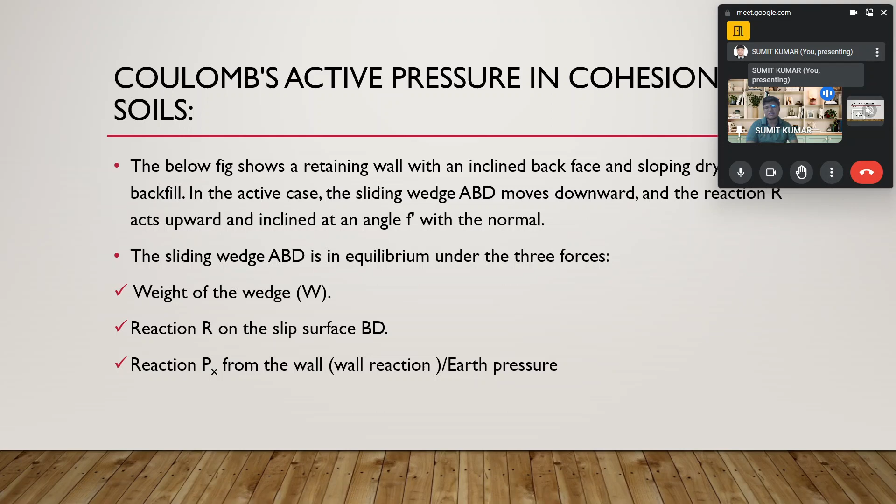Talking about the sliding wedge, the weight W is found by taking its area and multiplying by gamma, and the reaction R and Px are also there. That is one of the cases. These things have been discussed very clearly, so I will not go into detail here.

Now moving ahead, the wall faces active earth pressure and passive earth pressure. When it moves away from the backfill, active earth pressure develops; when it moves toward the backfill, passive earth pressure develops. If the wall remains stationary, the earth pressure at rest condition gets established.

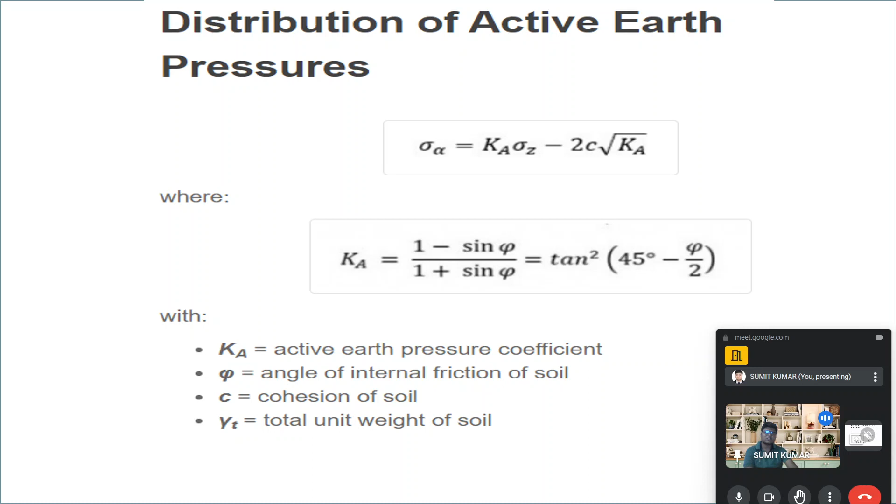For the distribution of active earth pressure, sigma A equals K into sigma Z minus 2C root K, where K equals 1 minus sin phi by 1 plus sin phi, equal to tan square of (45 minus phi by 2). For the distribution of passive earth pressure, sigma P equals Kp into sigma Z plus 2C root Kp, where Kp equals 1 plus sin phi by 1 minus sin phi, equal to tan square of (45 plus phi by 2).

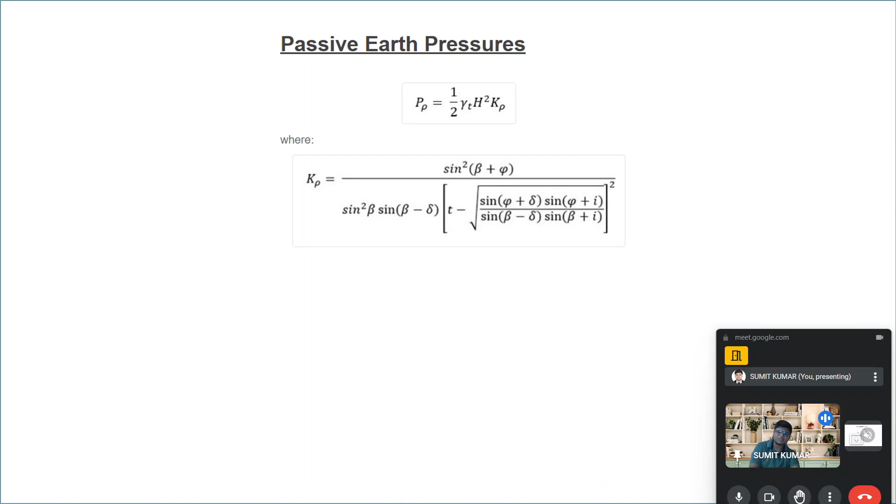Talking about the inclined ground surface, which has also been represented, K and Kp are shown for when the ground surface is inclined, and this interrelation gets established. You can go ahead with these interrelations stating the different relations according to Coulomb theory. The interrelation for active and passive earth pressure coefficients has been shown here, so I will not go into that much detail.

Earth pressure due to effective stress in the soil uses the effective unit weight, and there's also earth pressure due to the hydrostatic stress of the water. Now the graphical method is also presented.

So I will move now to sheet piles in geotechnical engineering. As we know, sheet piles are vertical barriers made of interlocking steel or concrete sheets that are driven into the ground to provide support for excavation or to prevent soil erosion. They are commonly used in construction and civil engineering projects. Sheet pile walls are typically thinner than masonry or reinforced concrete retaining walls, such as cantilever retaining walls. They can be constructed using materials such as steel, concrete, or timber. Steel sheet piles are the most commonly used type due to their strength, durability, and versatility.

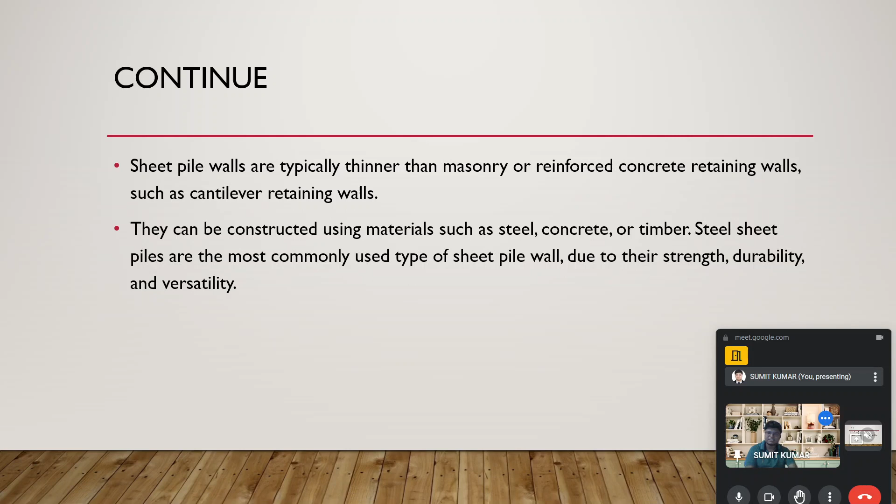Sheet pile walls are used in a wide variety of applications. For retaining walls, sheet pile walls can retain soil and prevent landslides, especially in areas with steep slopes or unstable soil conditions. For cofferdams, sheet pile walls are often used to create temporary structures that allow construction to take place below the water level. Sea walls and bulkheads are another area where sheet piles are implemented. Sheet pile walls can also be used to support bridge foundations, and to support excavations by acting as a support.

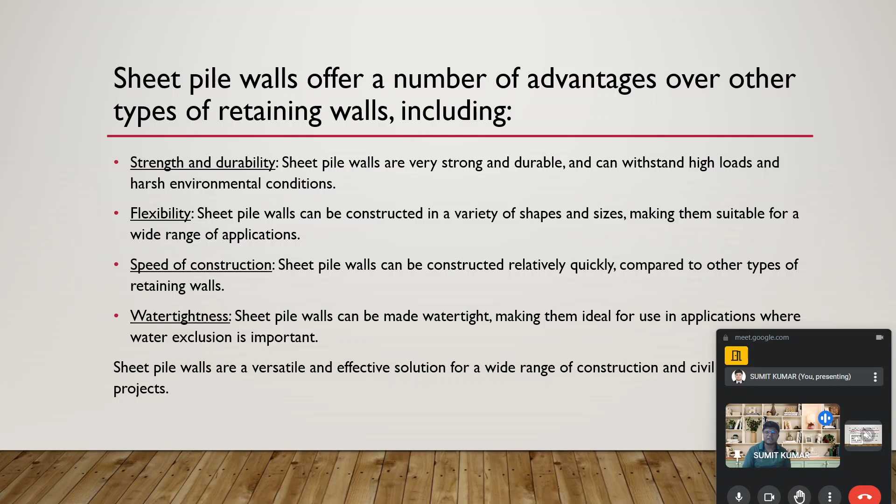Apart from that, sheet pile walls can be made watertight, making them ideal for use in applications where water exclusion is important. First, sheet pile walls provide support and remove water, after which the construction process can take place at those specific sites.

Now we talk about anchor bulkheads. Anchor bulkheads are retaining walls used to prevent soil erosion and provide an area suitable for docking. They are typically constructed by driving steel sheet piles into the ground and then anchoring them to a tie system. The tieback system can be made of steel cables, rods, or stirrups.

Anchor bulkheads are used in a variety of applications like waterfront structures, riverbank stabilization, highway and railway construction, and land reclamation. The components of anchor bulkheads are the sheet piles, tiebacks, wallers, coping, gravity bulkheads, and cantilever bulkheads.

Now, talking about the different types of anchor bulkheads: the gravity bulkhead and the cantilever bulkhead. The gravity bulkhead relies on its own weight, while the cantilever bulkhead relies on the tieback system to resist lateral pressure. Gravity bulkheads are typically used in shallow water applications, while cantilever bulkheads are normally used in deep water applications.

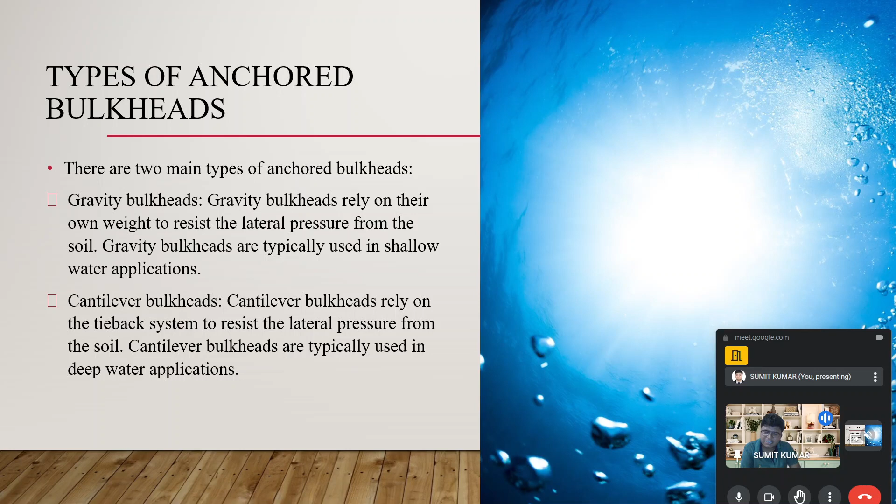The design of anchor bulkhead depends on the type of soil where the application takes place, and the depth of water is also of importance. Another two factors are the height of the bulkhead and the surcharge load coming on the bulkhead.

Talking about the construction of anchor bulkhead, it typically involves some steps: the sheet pile walls are driven into the ground, the tieback system is installed, the waller is connected to the top of the sheet piles, and the coping is placed on top of the sheet piles.

And the designing of anchor bulkhead is understood by us. Now the advantages which it offers need to be understood.

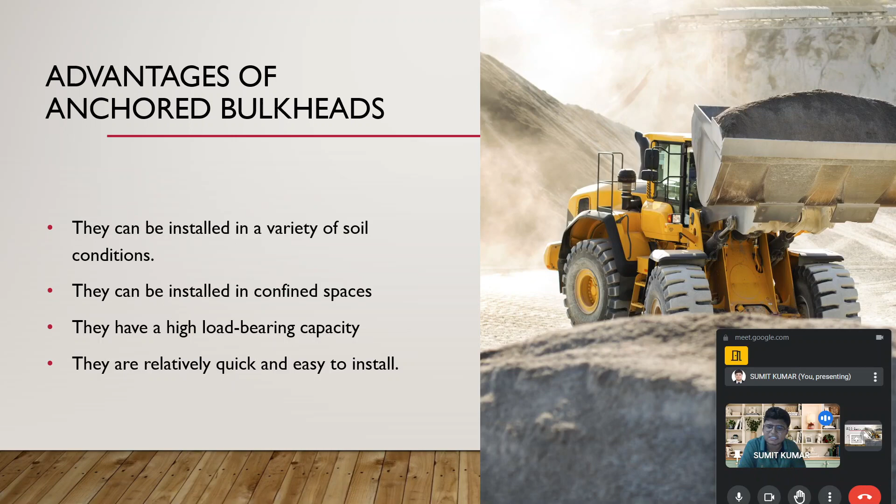The advantages it offers are that they can be installed in a variety of soil conditions, they can be installed in confined spaces, they have high load carrying capacity, and they are relatively quick and easy to install. Talking about the disadvantages, they can be expensive to install, they require regular maintenance and inspection, and they are susceptible to corrosion as well.

Talking about some more disadvantages - okay, no, these are the same disadvantages mentioned in the previous slide. Talking about applications: waterfront structures, riverbank stabilization, highway and railway, and land reclamation. This has also been discussed. Now talking about some history of the anchor bulkhead.

Anchor bulkheads have been used for over 100 years. The first anchor bulkheads were built in the 19th century to protect the coastlines of Europe and North America from erosion. Anchor bulkheads were also extensively used in the construction of the Panama Canal in the early 20th century.

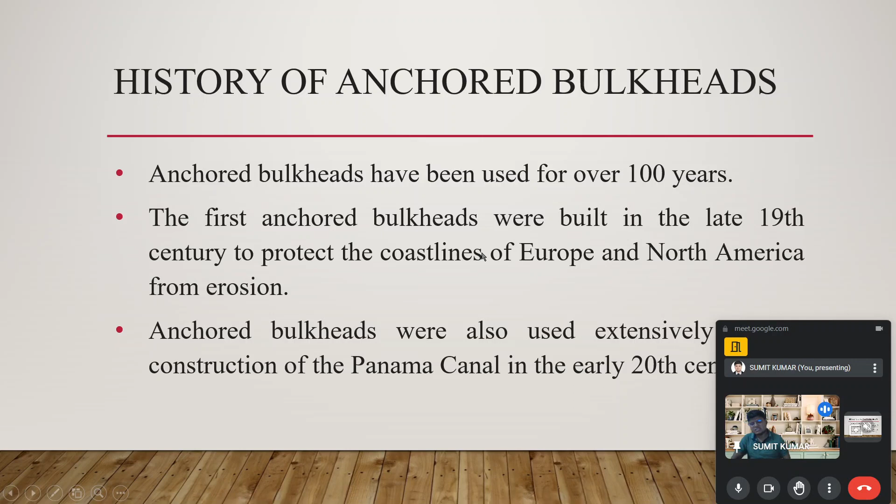This is one of the case studies which could be understood, where the anchor bulkhead has been used.

Talking about the design procedure followed for anchor bulkheads: first, the site investigation takes place, and then structural analysis is performed to determine the loads that will be applied on the bulkhead. Afterward, the design of the sheet pile wall to resist lateral pressure is found, and then the tieback system is designed. The site is prepared by clearing the area of debris and leveling the ground.

Now we move to slope stability, which we discussed at the end of the section. First I will discuss slope stability in detail, and then we have some small problems, objective types, which we will discuss, and with that we will conclude today's session.

This type of failure is quite dangerous and very risky to the protection of people's lives. If some construction gets damaged, people may be there and could be submerged due to these landslides, and may lose their life.

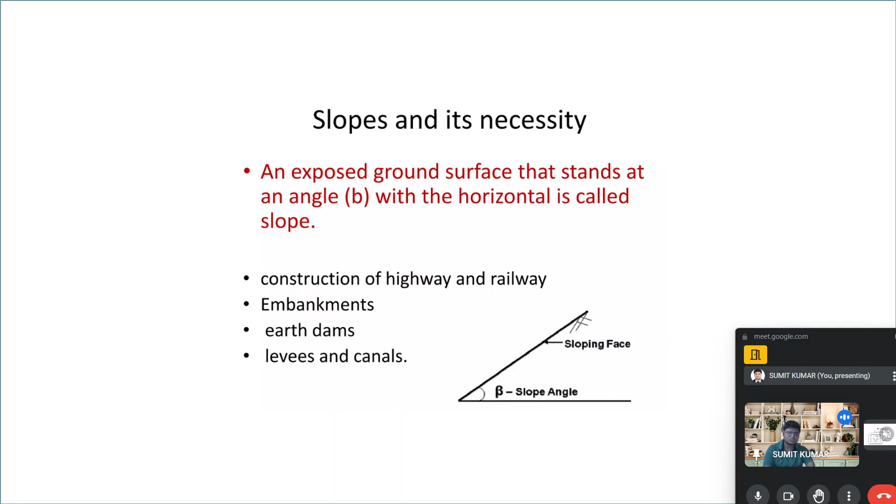Talking about the types of slopes, there are two types: infinite slopes and finite slopes. Infinite slopes have dimensions that extend over a great distance, and the soil mass is inclined to the horizontal.

Talking about the types of slope, there can be natural slopes and man-made slopes. Natural slopes are formed by the geological features of earth, while man-made slopes are constructed through activities like cutting and filling. In general, most slopes are natural slopes, while man-made slopes are limited.

Now we need to understand why we want to understand slopes, because the failure of natural slopes, landslides, and man-made slopes has resulted in much loss of life and destruction. Civil engineers are expected to check the safety of natural slopes and slopes of excavation.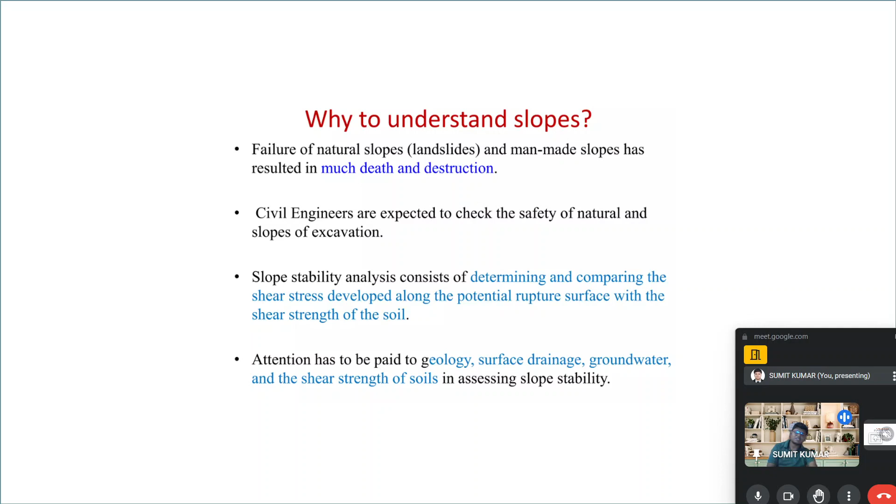Slope failure triggering mechanisms include intense rainfall, water level changes, seepage water flow, volcanic eruption, earthquake shaking, and human activity like excavation, which can act as a trigger for slope failure.

Causes of slope failure: erosion is one of the causes. Wind and flowing water cause erosion of the top surface of the slope and make the slope steep, thereby increasing the tangential component of the driving force.

Steady seepage force in the sloping direction adds to gravity forces and makes the slope susceptible to instability. The pore water pressure decreases the strength, and this condition is critical for the downstream slopes.

Talking about sudden drawdown, in this case there is a reversal in the direction of flow, resulting in instability of side slopes. Due to the sudden drawdown, shear stress is more due to the saturated unit weight, while shearing resistance decreases due to the pore water pressure that does not dissipate quickly.

Rainfall: a long period of rainfall saturates, softens and erodes the soil. Water enters into existing cracks and may weaken the underlying soil layers, leading to failure, for example, mudslides.

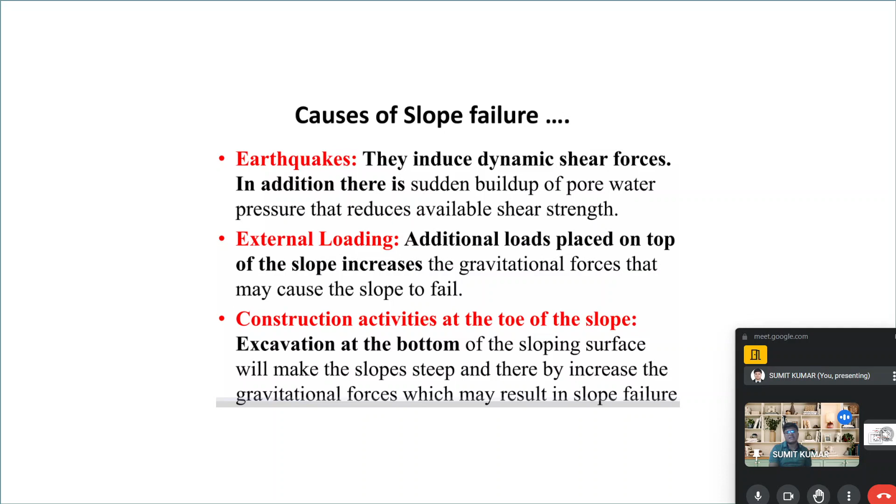The slip plane or failure plane or slip surface or failure surface is the surface of sliding. The sliding mass is the mass of soil within the slip plane and the ground surface. The slope angle is the angle of inclination of a slope to the horizontal.

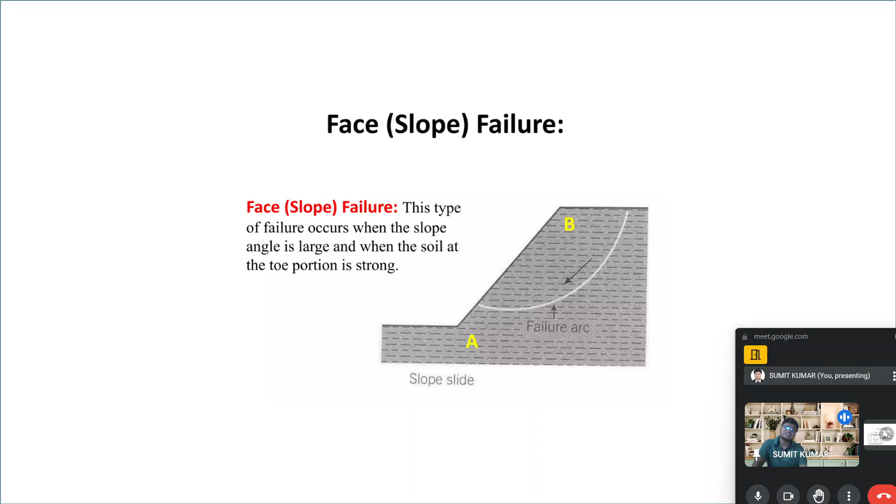The face failure occurs when the slope angle is large and the soil at the toe portion is strong. Talking about the toe failure, in this case the failure surface passes through the toe, and this occurs when the slope is steep and homogeneous.

Talking about the base failure, in this case the failure surface passes below the toe, and this generally occurs when the soil below the toe is relatively weak and soft.

Talking about the analysis of slope, the factor of safety of slope is defined as the ratio of average shear strength of soil to the average shear stress developed along the potential failure surface. So Fs is tau f by tau d, and the shear strength of soil is given by tau f equal to c plus sigma tan phi, where c is the cohesion, phi is the angle of internal friction, and sigma is the normal stress on the potential failure surface.

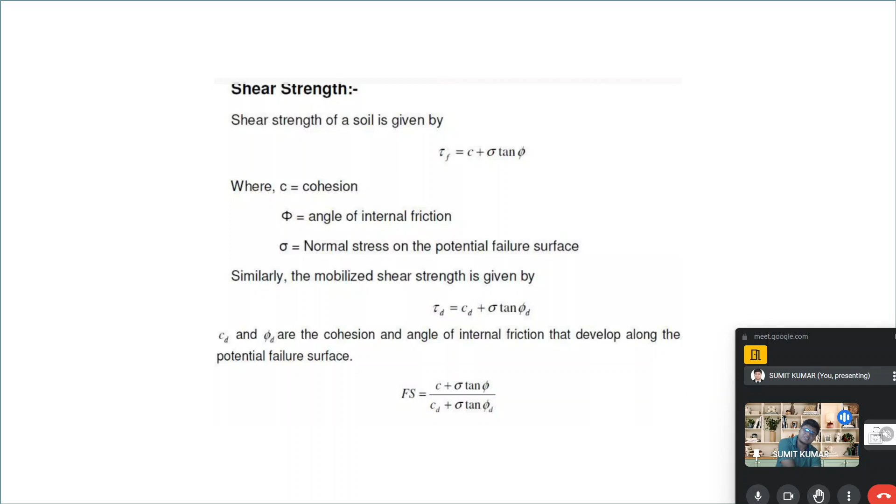Similarly, the mobilized shear strength is given by tau d equal to cd plus sigma tan phi d, and the factor of safety is represented similarly. When we talk of factor of safety with respect to cohesion, Fc equal to C by Cd, and F phi equal to tan phi by tan phi d. When Fc equal to F phi, then C by Cd becomes equal to tan phi by tan phi d. So Fs equal to Fc equal to F phi. When Fs equal to 1, the slope is said to be in a state of failure.

Talking about the finite slope, a finite slope is one with a base and top surface, the height being limited. The inclined face of the earth dam, embankment, excavation, and the like are all finite slopes.

The investigation of stability of finite slopes involves the following steps: assuming a possible slip surface, studying equilibrium of the forces acting on the surface, and repeating the process until the critical slip surface, that is the one with the minimum margin of safety, is found.

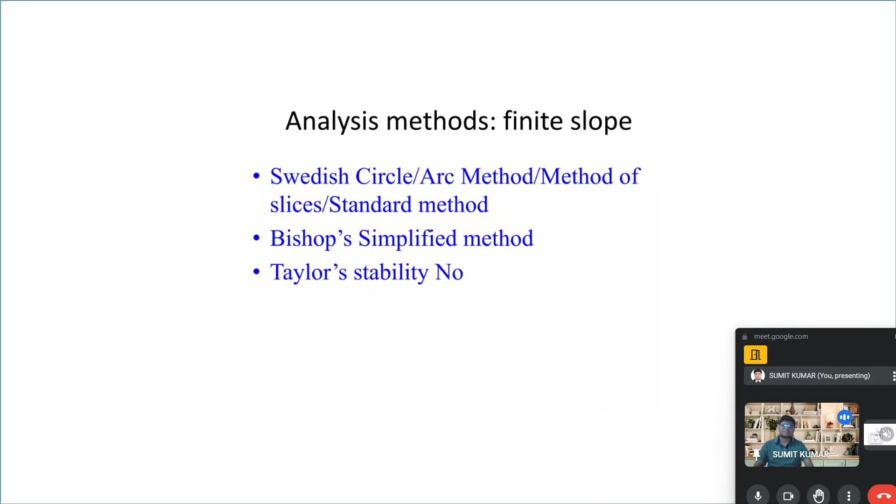The analysis methods for finite slope include the Swedish circle arc method, method of slices, standard method, Bishop simplified method, and Taylor stability number, which are some of the methods that need to be studied. The Swedish circle method or slices method for cohesive friction c-phi soil is adopted for the general type of soil which has combined c and phi properties.

These points have been discussed during the class, so you can go over there and see these things. The different cases of analysis are also there, like cohesive soil, cohesionless soil, and cohesion and friction soil. That discussion has taken place earlier.

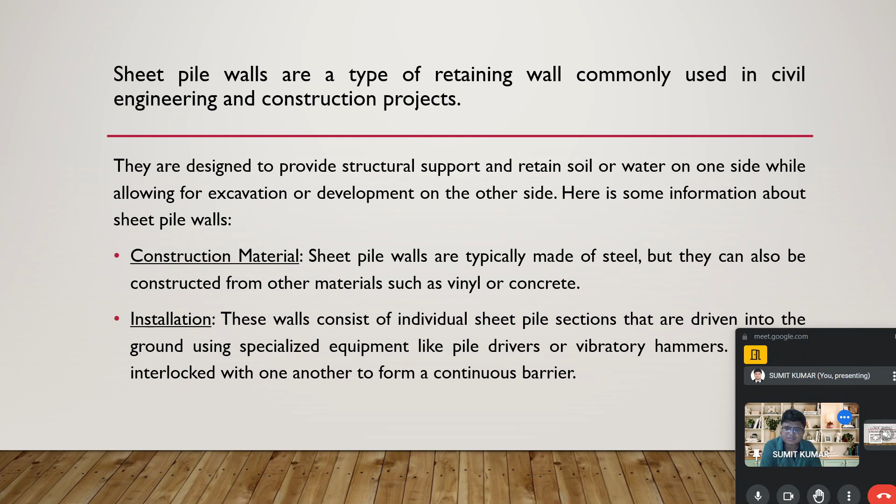Now we take some of the small problems before ending the session on slope stability.

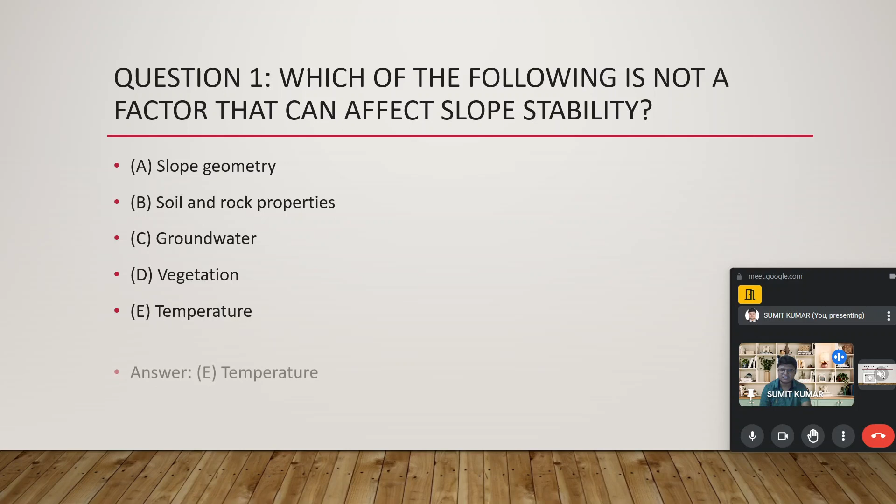Now see question number two: which of the following is the most common type of slope failure? Landslide, rock fall, debris fall, mud flow, or are all of the above equally common? I think you are clear with your answer, and the answer is A, that is landslide. Landslide is the most common type of slope failure which has been observed.

Now move to the next problem: the limit equilibrium method is the most common type of slope stability analysis method because it is easy to use and accurate. The options are both A and B, or neither of A and B. The correct answer is option C, that is both A and B.

Now we move to the next problem: which of the following is not a slope stabilization method? Drainage, retaining wall, buttress, vegetation - all of the above are slope stabilization methods, so it should be very much clear in your mind.

During our last class discussion, we came to know that all of these are slope stabilization methods, because providing proper drainage achieves stabilization. Retaining wall is one factor through which stabilization can be achieved. Buttress and growing vegetation act as reinforcement for stabilization.

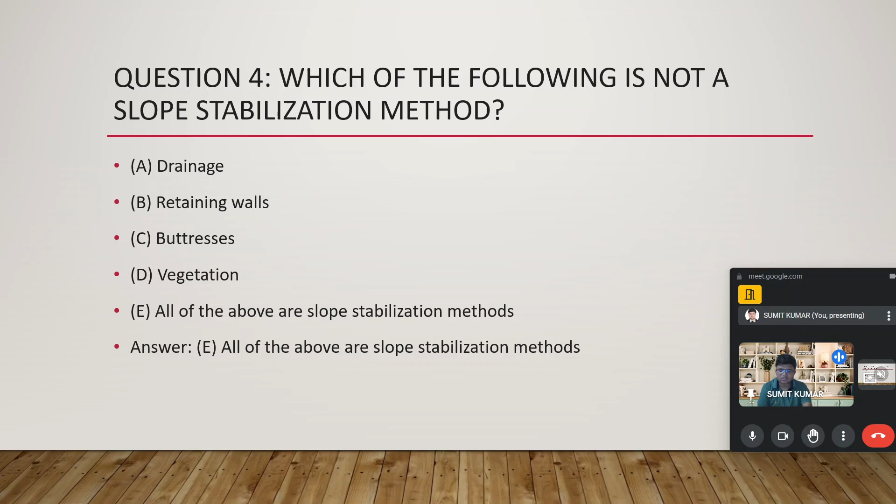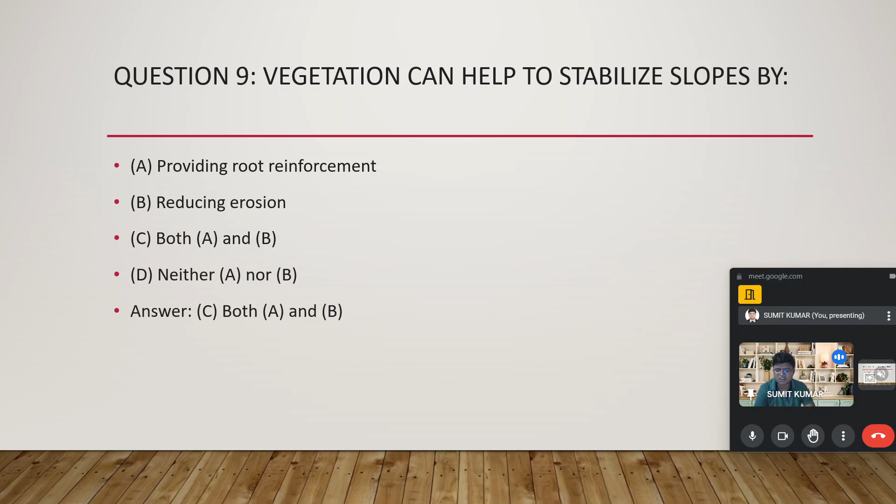So what is a debris flow? A debris flow is a type of landslide that is primarily composed of soil, rock, and water. Debris flows are often characterized by their high speed and destructive power.

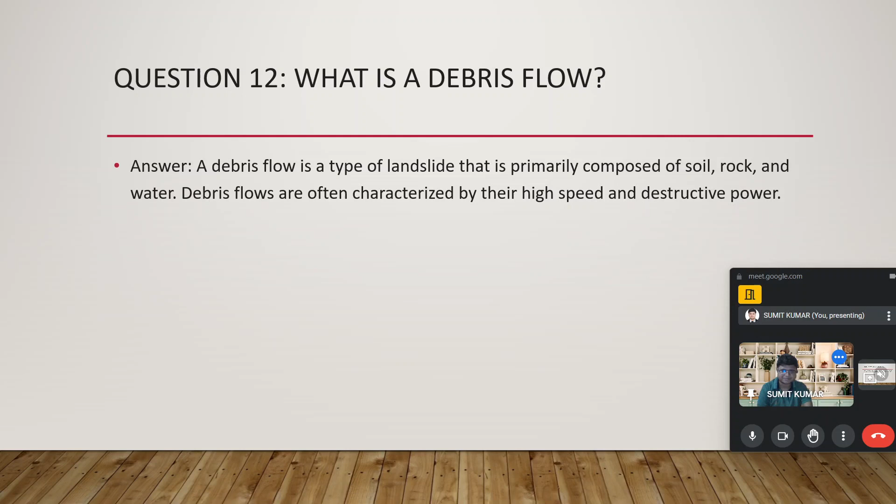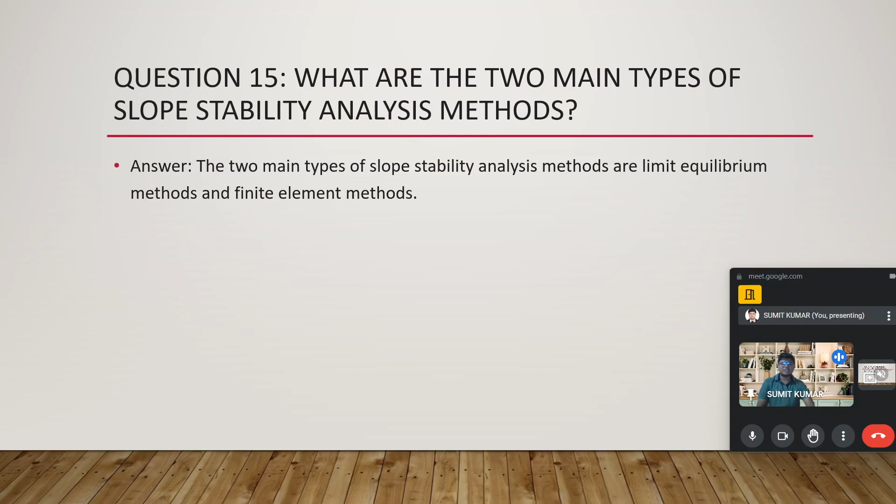The question states: what are the two main types of slope stability analysis methods? The answer is the limit equilibrium method and the finite element method, which we discussed in the last class.